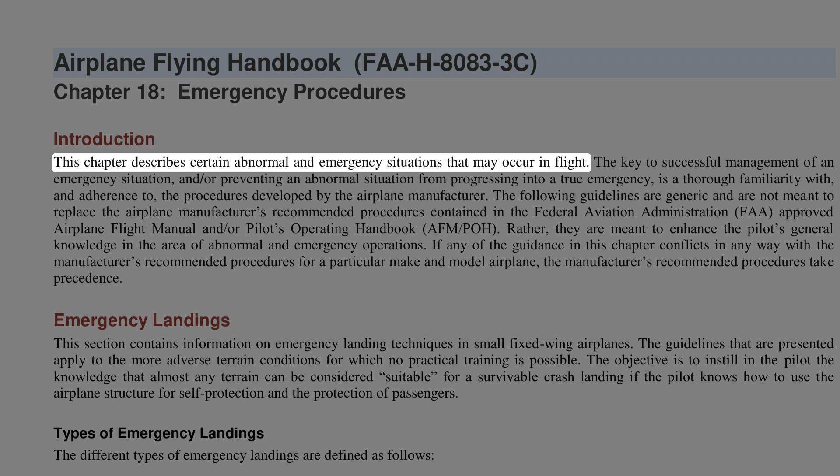Airplane Flying Handbook, FAA-H-8083-3C, Chapter 18, Emergency Procedures. Introduction. This chapter describes certain abnormal and emergency situations that may occur in flight.

The key to successful management of an emergency situation, and/or preventing an abnormal situation from progressing into a true emergency, is a thorough familiarity with, and adherence to, the procedures developed by the airplane manufacturer.

The following guidelines are generic and are not meant to replace the airplane manufacturer's recommended procedures contained in the Federal Aviation Administration (FAA) Approved Airplane Flight Manual and/or Pilot's Operating Handbook (AFM/POH). Rather, they are meant to enhance the pilot's general knowledge in the area of abnormal and emergency operations.

If any of the guidance in this chapter conflicts in any way with the manufacturer's recommended procedures for a particular make and model airplane, the manufacturer's recommended procedures take precedence.

Emergency landings. This section contains information on emergency landing techniques in small fixed-wing airplanes. The guidelines that are presented apply to the more adverse terrain conditions for which no practical training is possible. The objective is to instill in the pilot the knowledge that almost any terrain can be considered suitable for a survivable crash landing if the pilot knows how to use the airplane structure for self-protection and the protection of passengers.

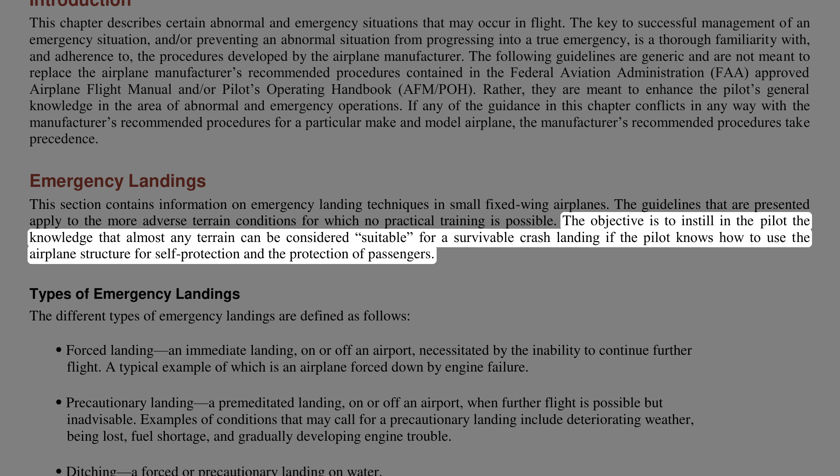Types of emergency landings. The different types of emergency landings are defined as follows. Forced landing: an immediate landing, on or off an airport, necessitated by the inability to continue further flight. A typical example of which is an airplane forced down by engine failure.

Precautionary landing: a premeditated landing, on or off an airport, when further flight is possible but inadvisable. Examples of conditions that may call for a precautionary landing include deteriorating weather, being lost, fuel shortage, and gradually developing engine trouble. Ditching: a forced or precautionary landing on water.

A precautionary landing, generally, is less hazardous than a forced landing because the pilot has more time for terrain selection and the planning of the approach. In addition, the pilot can use power to compensate for errors in judgment or technique.

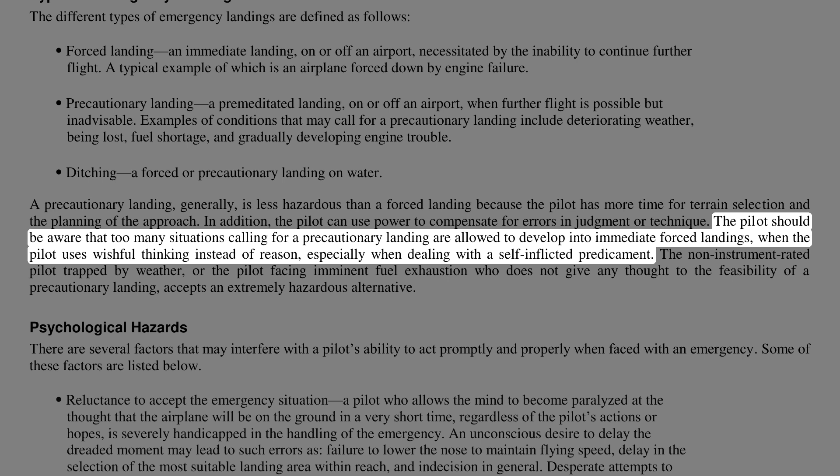The pilot should be aware that too many situations calling for a precautionary landing are allowed to develop into immediate forced landings when the pilot uses wishful thinking instead of reason, especially when dealing with a self-inflicted predicament. The non-instrument-rated pilot trapped by weather, or the pilot facing imminent fuel exhaustion who does not give any thought to the feasibility of a precautionary landing, accepts an extremely hazardous alternative.

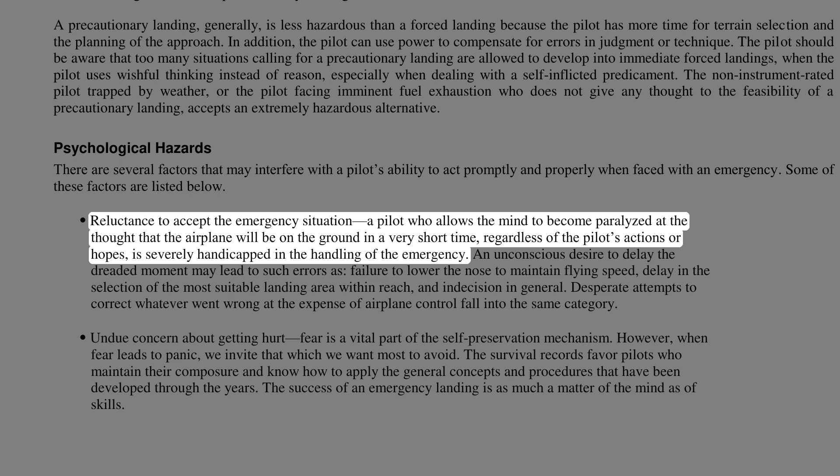Psychological hazards. There are several factors that may interfere with a pilot's ability to act promptly and properly when faced with an emergency. Some of these factors are listed below. Reluctance to accept the emergency situation. A pilot who allows the mind to become paralyzed at the thought that the airplane will be on the ground in a very short time, regardless of the pilot's actions or hopes, is severely handicapped in the handling of the emergency.

An unconscious desire to delay the dreaded moment may lead to such errors as failure to lower the nose to maintain flying speed, delay in the selection of the most suitable landing area within reach, and indecision in general. Desperate attempts to correct whatever went wrong at the expense of airplane control fall into the same category.

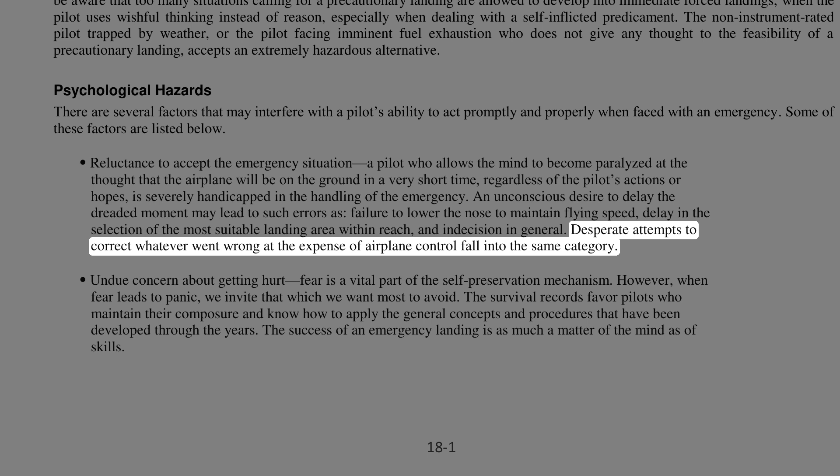Undue concern about getting hurt. Fear is a vital part of the self-preservation mechanism. However, when fear leads to panic, we invite that which we want most to avoid. The survival records favor pilots who maintain their composure and know how to apply the general concepts and procedures that have been developed through the years. The success of an emergency landing is as much a matter of the mind as of skills.

Desire to save the airplane. The pilot who has been conditioned during training to expect to find a relatively safe landing area, whenever the flight instructor closed the throttle for a simulated forced landing, may ignore all basic rules of airmanship to avoid a touchdown in terrain where airplane damage is unavoidable.

Typical consequences are making a 180 degree turn back to the runway when available altitude is insufficient, stretching the glide without regard for minimum control speed in order to reach a more appealing field, and accepting an approach and touchdown situation that leaves no margin for error.

The desire to save the airplane, regardless of the risks involved, may be influenced by two other factors: the pilot's financial stake in the airplane and the certainty that an undamaged airplane implies no bodily harm. There are times, however, when a pilot should be more interested in sacrificing the airplane so that the occupants can safely walk away from it. Basic safety concepts. General.

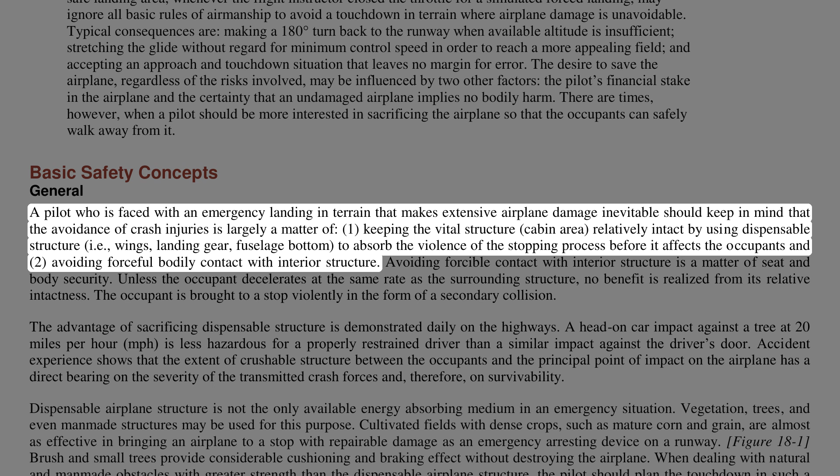A pilot who is faced with an emergency landing in terrain that makes extensive airplane damage inevitable should keep in mind that the avoidance of crash injuries is largely a matter of: 1. Keeping the vital structure, cabin area, relatively intact by using dispensable structure, i.e., wings, landing gear, fuselage bottom, to absorb the violence of the stopping process before it affects the occupants, and 2. Avoiding forceful bodily contact with interior structure.

Avoiding forcible contact with interior structure is a matter of seat and body security. Unless the occupant decelerates at the same rate as the surrounding structure, no benefit is realized from its relative intactness. The occupant is brought to a stop violently in the form of a secondary collision.

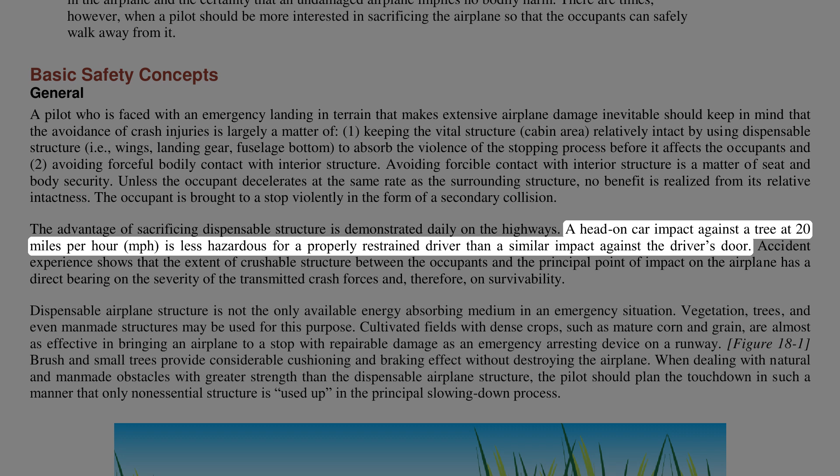The advantage of sacrificing dispensable structure is demonstrated daily on the highways. A head-on car impact against a tree at 20 miles per hour, mph, is less hazardous for a properly restrained driver than a similar impact against the driver's door. Accident experience shows that the extent of crushable structure between the occupants and the principal point of impact on the airplane has a direct bearing on the severity of the transmitted crash forces and, therefore, on survivability.

Dispensable airplane structure is not the only available energy-absorbing medium in an emergency situation. Vegetation, trees, and even man-made structures may be used for this purpose. Cultivated fields with dense crops, such as mature corn and grain, are almost as effective in bringing an airplane to a stop with repairable damage as an emergency arresting device on a runway. Brush and small trees provide considerable cushioning and braking effect without destroying the airplane.

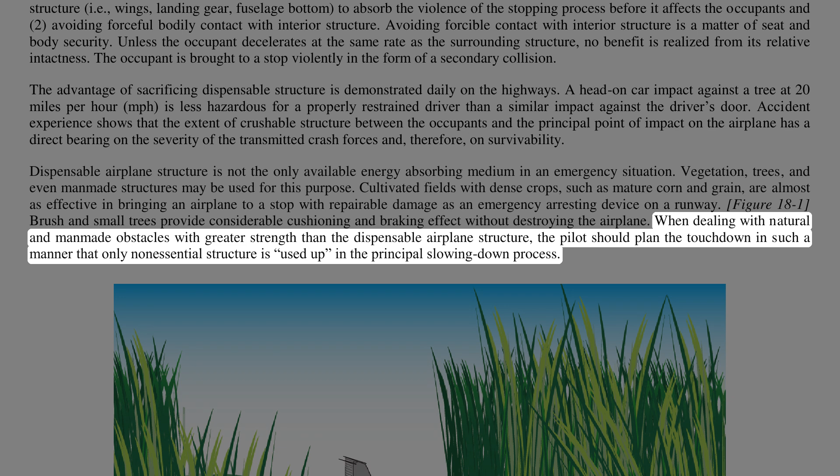When dealing with natural and man-made obstacles with greater strength than the dispensable airplane structure, the pilot should plan the touchdown in such a manner that only non-essential structure is used up in the principal slowing down process. The overall severity of a deceleration process is governed by speed, ground speed, and stopping distance. The most critical of these is speed. Doubling the ground speed means quadrupling the total destructive energy and vice versa.

Even a small change in ground speed at touchdown, be it as a result of wind or pilot technique, affects the outcome of a controlled crash. It is important that the actual touchdown during an emergency landing be made at the lowest possible controllable airspeed, using all available aerodynamic devices. Most pilots instinctively, and correctly, look for the largest available flat and open field for an emergency landing.

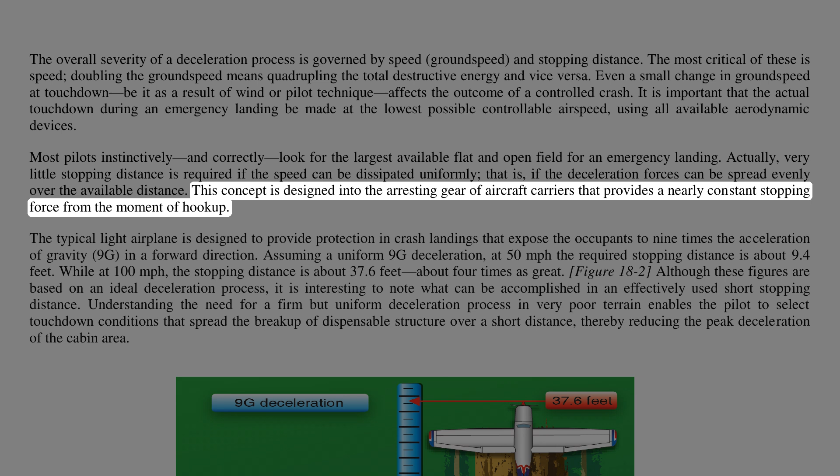Actually, very little stopping distance is required if the speed can be dissipated uniformly, that is, if the deceleration forces can be spread evenly over the available distance. This concept is designed into the arresting gear of aircraft carriers that provides a nearly constant stopping force from the moment of hookup. The typical light airplane is designed to provide protection in crash landings that expose the occupants to 9 times the acceleration of gravity, 9g, in a forward direction.

Assuming a uniform 9g deceleration, at 50 miles per hour the required stopping distance is about 9.4 feet. While at 100 miles per hour, the stopping distance is about 37.6 feet, about 4 times as great. Although these figures are based on an ideal deceleration process, it is interesting to note what can be accomplished in an effectively used short stopping distance.

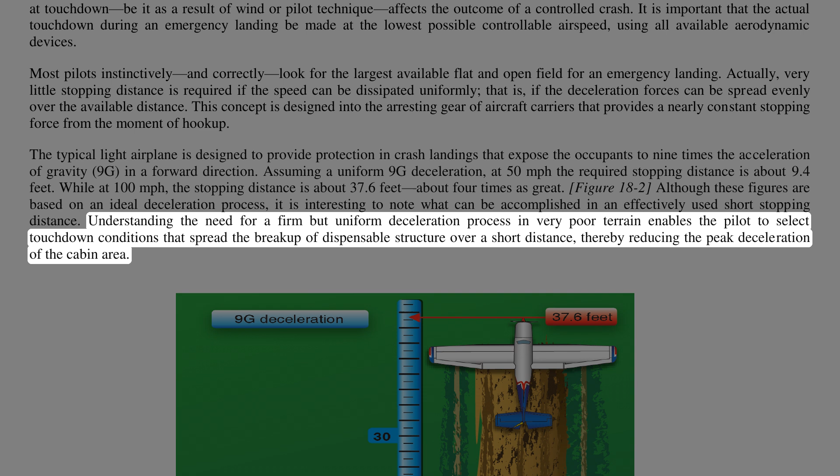Understanding the need for a firm but uniform deceleration process in very poor terrain enables the pilot to select touchdown conditions that spread the breakup of dispensable structure over a short distance, thereby reducing the peak deceleration of the cabin area. Attitude and sink rate control. The most critical and often the most inexcusable error that can be made in the planning and execution of an emergency landing, even in ideal terrain, is the loss of initiative over the airplane's attitude and sink rate at touchdown.

When the touchdown is made on flat, open terrain, an excessive nose-low pitch attitude brings the risk of sticking the nose in the ground. Steep bank angles just before touchdown should also be avoided, as they increase the stalling speed and the likelihood of a wingtip strike. Since the airplane's vertical component of velocity is immediately reduced to 0 upon ground contact, it should be kept well under control.

A flat touchdown at a high sink rate, well in excess of 500 feet per minute, FPM, on a hard surface can be injurious without destroying the cabin structure, especially during gear-up landings in low-wing airplanes. A rigid bottom construction of these airplanes may preclude adequate cushioning by structural deformation. Similar impact conditions may cause structural collapse of the overhead structure in high-wing airplanes. On soft terrain, an excessive sink rate may cause digging in of the lower nose structure and severe forward deceleration. Terrain selection.

A pilot's choice of emergency landing sites is governed by the route selected during pre-flight planning, the height above the ground when the emergency occurs, and excess airspeed. Excess airspeed can be converted into distance and/or altitude.

The only time the pilot has a very limited choice is during the low and slow portion of the takeoff. However, even under these conditions, the ability to change the impact heading only a few degrees may ensure a survivable crash. If beyond gliding distance of a suitable open area, the pilot should judge the available terrain for its energy-absorbing capability.

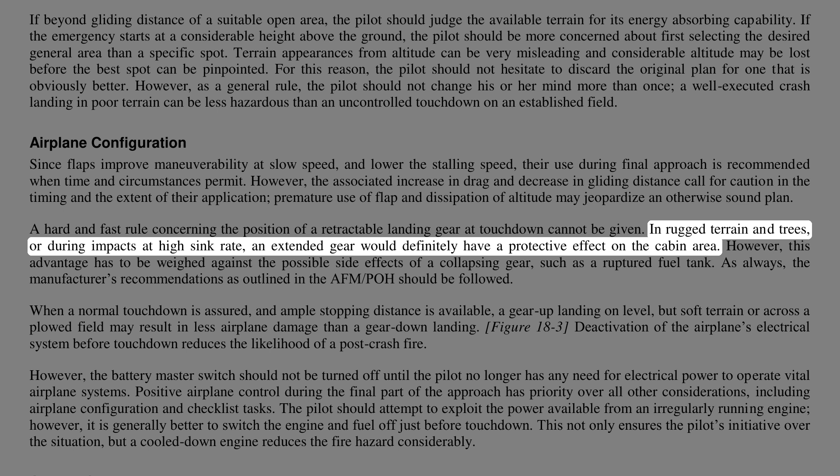A hard and fast rule concerning the position of a retractable landing gear at touchdown cannot be given. In rugged terrain and trees, or during impacts at high sink rate, an extended gear would definitely have a protective effect on the cabin area. However, this advantage has to be weighed against the possible side effects of a collapsing gear, such as a ruptured fuel tank. As always, the manufacturer's recommendations as outlined in the AFM/POH should be followed.

When a normal touchdown is assured, and ample stopping distance is available, a gear-up landing on level, but soft terrain or across a plowed field may result in less airplane damage than a gear-down landing.

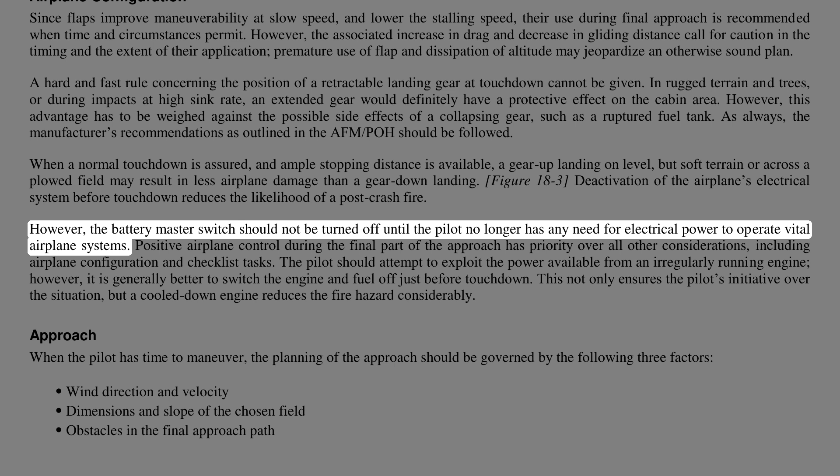Deactivation of the airplane's electrical system before touchdown reduces the likelihood of a post-crash fire. However, the battery master switch should not be turned off until the pilot no longer has any need for electrical power to operate vital airplane systems.

Positive airplane control during the final part of the approach has priority over all other considerations, including airplane configuration and checklist tasks. The pilot should attempt to exploit the power available from an irregularly running engine. However, it is generally better to switch the engine and fuel off just before touchdown. This not only ensures the pilot's initiative over the situation, but a cooled-down engine reduces the fire hazard considerably.

Approach. When the pilot has time to maneuver, the planning of the approach should be governed by three factors: wind direction and velocity, dimensions and slope of the chosen field, and obstacles in the final approach path. These three factors are seldom compatible. When compromises have to be made, the pilot should aim for a wind, obstacle, terrain combination that permits a final approach with some margin for error in judgment or technique.

A pilot who overestimates the gliding range may be tempted to stretch the glide across obstacles in the approach path. For this reason, it is sometimes better to plan the approach over an unobstructed area, regardless of wind direction. Experience shows that a collision with obstacles at the end of a ground roll or slide is much less hazardous than striking an obstacle at flying speed before the touchdown point is reached.

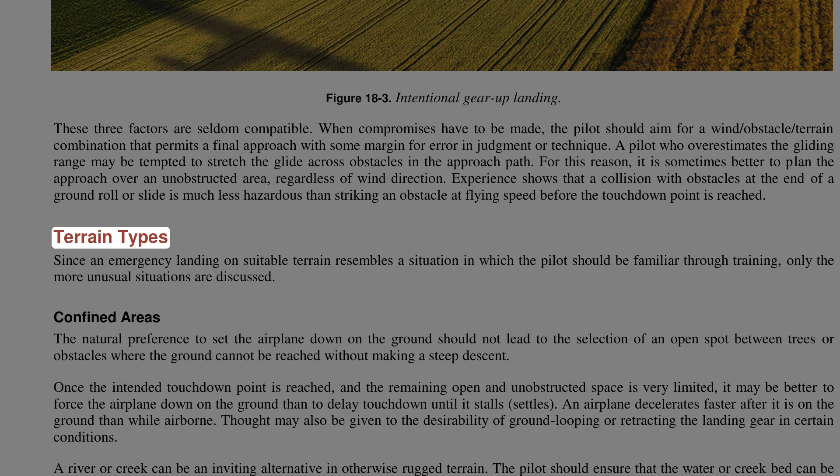Terrain types. Since an emergency landing on suitable terrain resembles a situation in which the pilot should be familiar through training, only the more unusual situations are discussed.

Confined areas. The natural preference to set the airplane down on the ground should not lead to the selection of an open spot between trees or obstacles where the ground cannot be reached without making a steep descent. Once the intended touchdown point is reached, and the remaining open and unobstructed space is very limited, it may be better to force the airplane down on the ground than to delay touchdown until it stalls and settles.

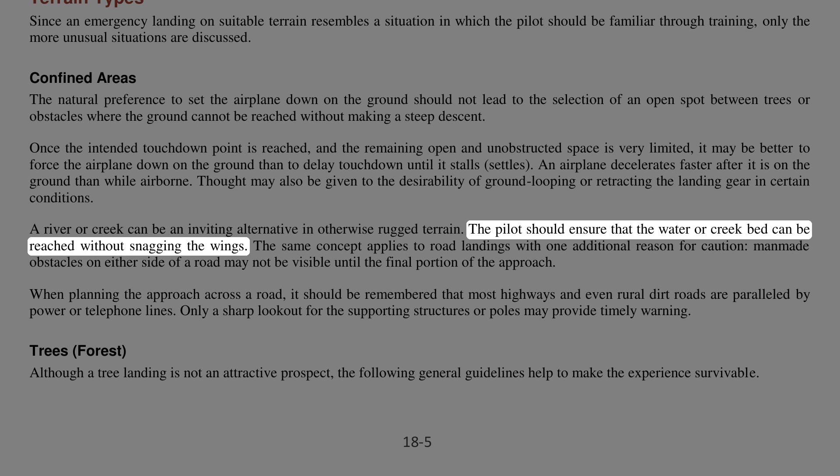An airplane decelerates faster after it is on the ground than while airborne. Thought may also be given to the desirability of ground looping or retracting the landing gear in certain conditions. A river or creek can be an inviting alternative in otherwise rugged terrain. The pilot should ensure that the water or creek bed can be reached without snagging the wings.

The same concept applies to road landings, with one additional reason for caution. Man-made obstacles on either side of a road may not be visible until the final portion of the approach. When planning the approach across a road, remember that most highways and even rural dirt roads are paralleled by power or telephone lines. Only a sharp lookout for the supporting structures or poles may provide timely warning.

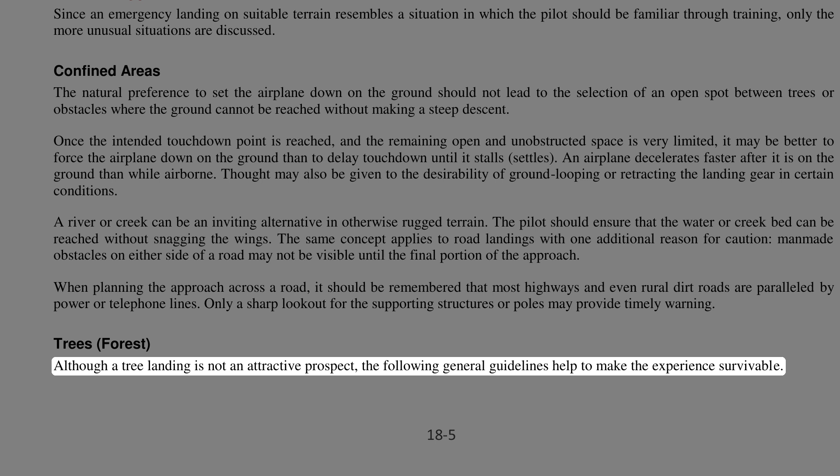Trees, forest. Although a tree landing is not an attractive prospect, the following general guidelines help make the experience survivable. Use the normal landing configuration, full flaps, gear down. Keep the ground speed low by heading into the wind. Make contact at minimum indicated airspeed, but not below stall speed, and hang the airplane in the tree branches in a nose-high landing attitude. Involving the underside of the fuselage and both wings in the initial tree contact provides a more even and positive cushioning effect, while preventing penetration of the windshield.

Avoid direct contact of the fuselage with heavy tree trunks. Low, closely spaced trees with wide, dense crowns, with branches close to the ground, are much better than tall trees with thin tops. The latter allow too much free fall height. A free fall from 75 feet results in an impact speed of about 40 knots, or about 4,000 feet per minute.

Ideally, initial tree contact should be symmetrical, that is, both wings should meet equal resistance in the tree branches. This distribution of the load helps maintain proper airplane attitude. It may also preclude the loss of one wing, which invariably leads to a more rapid and less predictable descent to the ground. If heavy tree trunk contact is unavoidable once the airplane is on the ground, it is best to involve both wings simultaneously by directing the airplane between two properly spaced trees. Do not attempt this maneuver, however, while still airborne.

Water, ditching, and snow. A well-executed water landing normally involves less deceleration violence than a poor tree landing or a touchdown on extremely rough terrain. Also, an airplane that is ditched at minimum speed and in a normal landing attitude does not immediately sink upon touchdown. Intact wings and fuel tanks, especially when empty, provide flotation for at least several minutes, even if the cabin may be just below the waterline in a high-wing airplane.

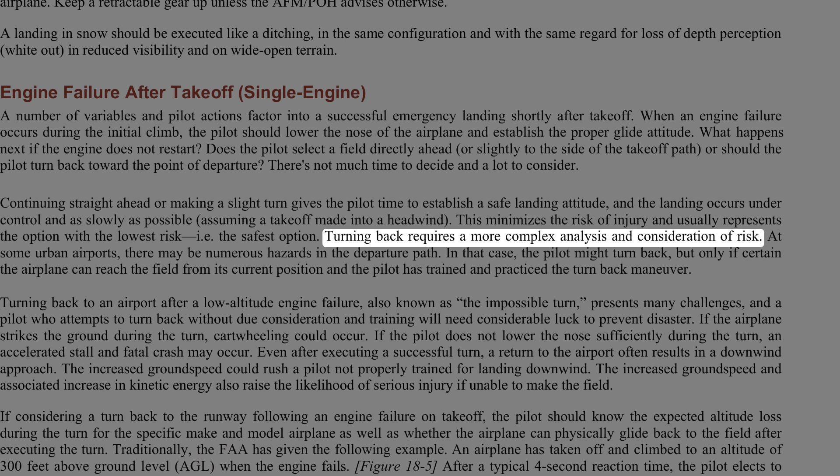Turning back requires a more complex analysis and consideration of risk. At some urban airports, there may be numerous hazards in the departure path. In that case, the pilot might turn back, but only if certain the airplane can reach the field from its current position, and the pilot has trained and practiced the turn-back maneuver.

Turning back to an airport after a low-altitude engine failure, also known as the impossible turn, presents many challenges, and a pilot who attempts to turn back without due consideration and training will need considerable luck to prevent disaster. If the airplane strikes the ground during the turn, cartwheeling could occur. If the pilot does not lower the nose sufficiently during the turn, an accelerated stall and fatal crash may occur. Even after executing a successful turn, a return to the airport often results in a downwind approach.

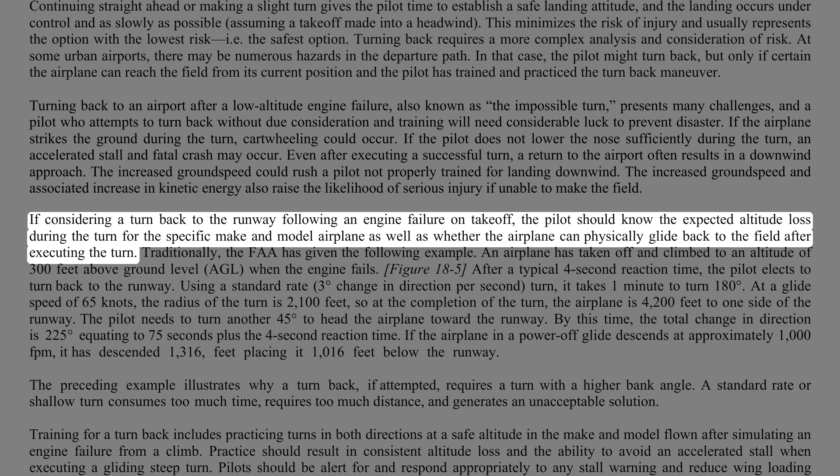The increased ground speed could rush a pilot not properly trained for landing downwind. The increased ground speed and associated increase in kinetic energy also raise the likelihood of serious injury if unable to make the field. If considering a turn back to the runway following an engine failure on takeoff, the pilot should know the expected altitude loss during the turn for the specific make and model airplane, as well as whether the airplane can physically glide back to the field after executing the turn.

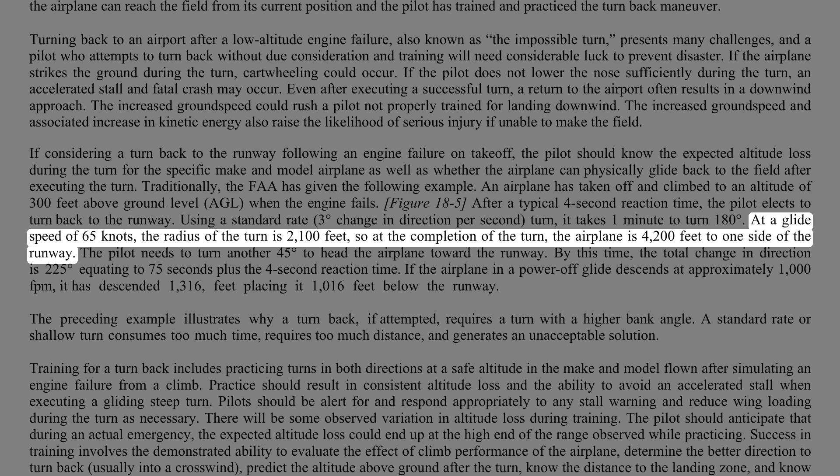Traditionally, the FAA has given the following example. An airplane has taken off and climbed to an altitude of 300 feet above ground level when the engine fails. After a typical 4-second reaction time, the pilot elects to turn back to the runway. Using a standard rate, 3 degrees change in direction per second, turn, it takes 1 minute to turn 180 degrees. At a glide speed of 65 knots, the radius of the turn is 2,100 feet, so at the completion of the turn, the airplane is 4,200 feet to one side of the runway.

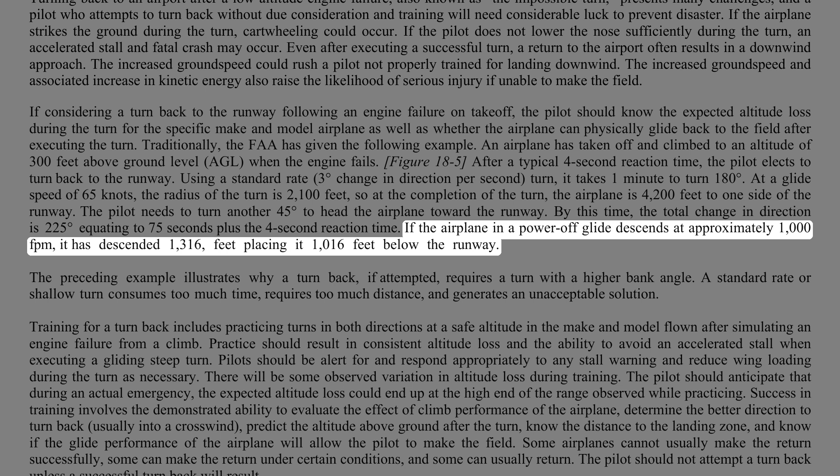The pilot needs to turn another 45 degrees to head the airplane toward the runway. By this time, the total change in direction is 225 degrees, equating to 75 seconds plus the 4-second reaction time. If the airplane in a power-off glide descends at approximately 1,000 feet per minute, it has descended 1,316 feet, placing it 1,016 feet below the runway. The preceding example illustrates why a turn back, if attempted, requires a turn with a higher bank angle. A standard rate or shallow turn consumes too much time, requires too much distance, and generates an unacceptable solution.

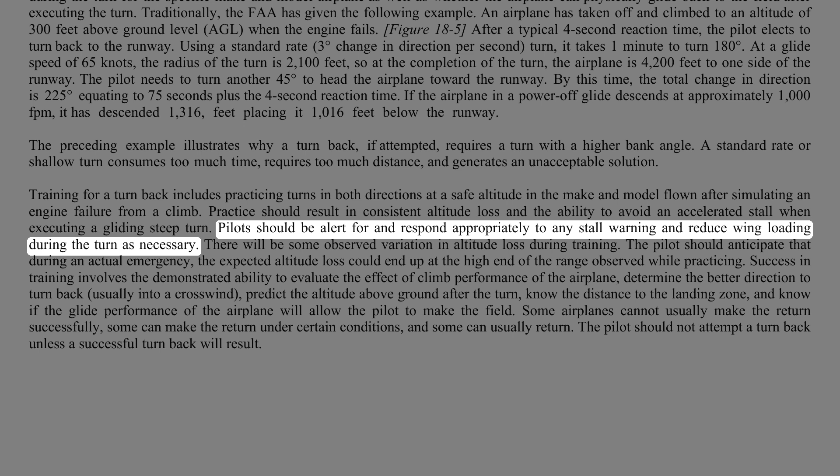Training for a turn back includes practicing turns in both directions at a safe altitude in the make and model flown, after simulating an engine failure from a climb. Practice should result in consistent altitude loss and the ability to avoid an accelerated stall when executing a gliding steep turn. Pilots should be alert for and respond appropriately to any stall warning and reduce wing loading during the turn as necessary. There will be some observed variation in altitude loss during training. The pilot should anticipate that during an actual emergency, the expected altitude loss could end up at the high end of the range observed while practicing.

Success in training involves the demonstrated ability to evaluate the effect of climb performance of the airplane, determine the better direction to turn back, usually into a crosswind, predict the altitude above ground after the turn, know the distance to the landing zone, and know if the glide performance of the airplane will allow the pilot to make the field. Some airplanes cannot usually make the return successfully, some can make the return under certain conditions, and some can usually return. The pilot should not attempt to turn back unless a successful turn back will result.

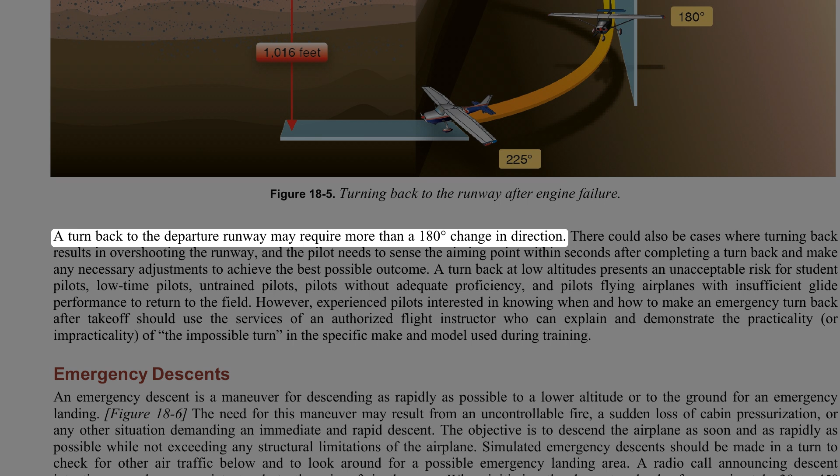A turn back to the departure runway may require more than a 180 degree change in direction. There could also be cases where turning back results in overshooting the runway, and the pilot needs to sense the aiming point within seconds after completing a turn back and make any necessary adjustments to achieve the best possible outcome.

A turn back at low altitudes presents an unacceptable risk for student pilots, low-time pilots, untrained pilots, pilots without adequate proficiency, and pilots flying airplanes with insufficient glide performance to return to the field. However, experienced pilots interested in knowing when and how to make an emergency turn back after takeoff should use the services of an authorized flight instructor who can explain and demonstrate the practicality, or impracticality, of the impossible turn in the specific make and model used during training.

Emergency descents. An emergency descent is a maneuver for descending as rapidly as possible to a lower altitude or to the ground for an emergency landing. The need for this maneuver may result from an uncontrollable fire, a sudden loss of cabin pressurization, or any other situation demanding an immediate and rapid descent.

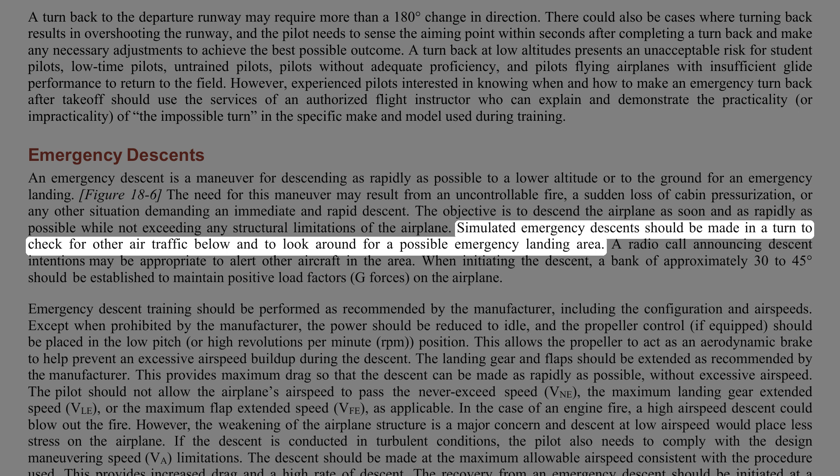The objective is to descend the airplane as soon and as rapidly as possible while not exceeding any structural limitations of the airplane. Simulated emergency descents should be made in a turn to check for other air traffic below and to look around for a possible emergency landing area. A radio call announcing descent intentions may be appropriate to alert other aircraft in the area. When initiating the descent, a bank of approximately 30 to 45 degrees should be established to maintain positive load factors, G-forces, on the airplane. Emergency descent training should be performed as recommended by the manufacturer, including the configuration and airspeeds.

Except when prohibited by the manufacturer, the power should be reduced to idle, and the propeller control, if equipped, should be placed in the low pitch, or high RPM, position. This allows the propeller to act as an aerodynamic brake to help prevent an excessive airspeed buildup during the descent.

The landing gear and flaps should be extended as recommended by the manufacturer. This provides maximum drag so that the descent can be made as rapidly as possible, without excessive airspeed. The pilot should not allow the airplane's airspeed to pass the never exceed speed, VNE, the maximum landing gear extended speed, VLE,

or the maximum flap extended speed, VFE, as applicable. In the case of an engine fire, a high airspeed descent could blow out the fire. However, the weakening of the airplane structure is a major concern, and descent at low airspeed would place less stress on the airplane. If the descent is conducted in turbulent conditions, the pilot also needs to comply with the design maneuvering speed, VA, limitations.

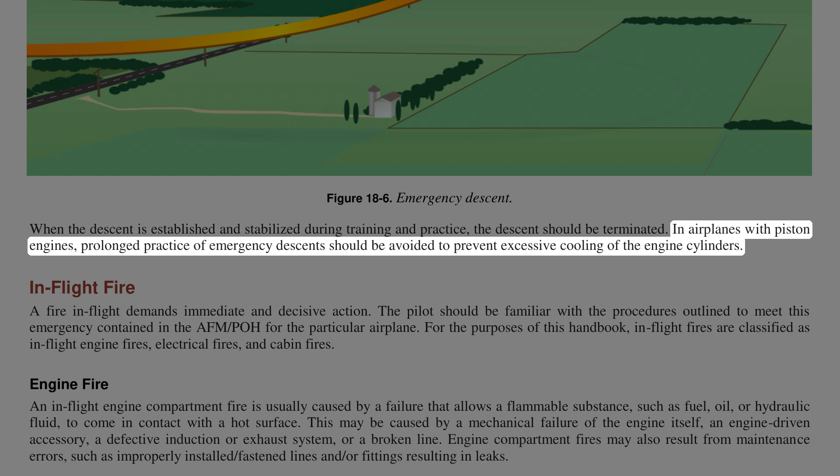The recovery from an emergency descent should be initiated at a high enough altitude to ensure a safe recovery back to level flight or a precautionary landing. When the descent is established and stabilized during training and practice, the descent should be terminated. In airplanes with piston engines, prolonged practice of emergency descents should be avoided to prevent excessive cooling of the engine cylinders.

In-flight fire. A fire in flight demands immediate and decisive action. The pilot should be familiar with the procedures outlined to meet this emergency contained in the AFM/POH for the particular airplane. For the purposes of this handbook, in-flight fires are classified as in-flight engine fires, electrical fires, and cabin fires.

Engine fire. An in-flight engine compartment fire is usually caused by a failure that allows a flammable substance, such as fuel, oil, or hydraulic fluid, to come in contact with a hot surface. This may be caused by a mechanical failure of the engine itself, an engine-driven accessory, a defective induction or exhaust system, or a broken line.

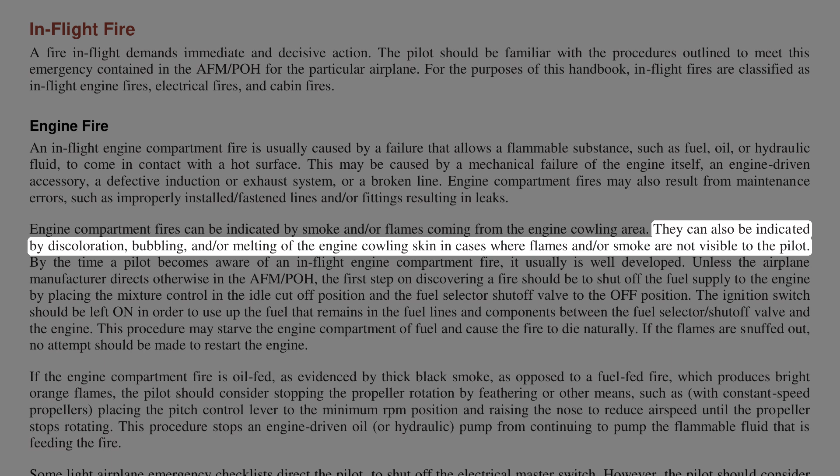Engine compartment fires may also result from maintenance errors, such as improperly installed or fastened lines and fittings resulting in leaks. Engine compartment fires can be indicated by smoke and/or flames coming from the engine cowling area. They can also be indicated by discoloration, bubbling, and/or melting of the engine cowling skin in cases where flames and/or smoke are not visible to the pilot.

By the time a pilot becomes aware of an in-flight engine compartment fire, it usually is well developed. Unless the airplane manufacturer directs otherwise in the AFM/POH, the first step on discovering a fire should be to shut off the fuel supply to the engine by placing the mixture control in the idle cutoff position and the fuel selector shutoff valve to the off position.

The ignition switch should be left on in order to use up the fuel that remains in the fuel lines and components between the fuel selector shutoff valve and the engine. This procedure may starve the engine compartment of fuel and cause the fire to die naturally. If the flames are snuffed out, no attempt should be made to restart the engine.

If the engine compartment fire is oil-fed, as evidenced by thick black smoke, as opposed to a fuel-fed fire, which produces bright orange flames, the pilot should consider stopping the propeller rotation by feathering or other means, such as, with constant speed propellers, placing the pitch control lever to the minimum RPM position and raising the nose to reduce airspeed until the propeller stops rotating.

This procedure stops an engine-driven oil or hydraulic pump from continuing to pump the flammable fluid that is feeding the fire. Some light airplane emergency checklists direct the pilot to shut off the electrical master switch. However, the pilot should consider that unless the fire is electrical in nature or a crash landing is imminent, deactivating the electrical system prevents the use of panel radios for transmitting distress messages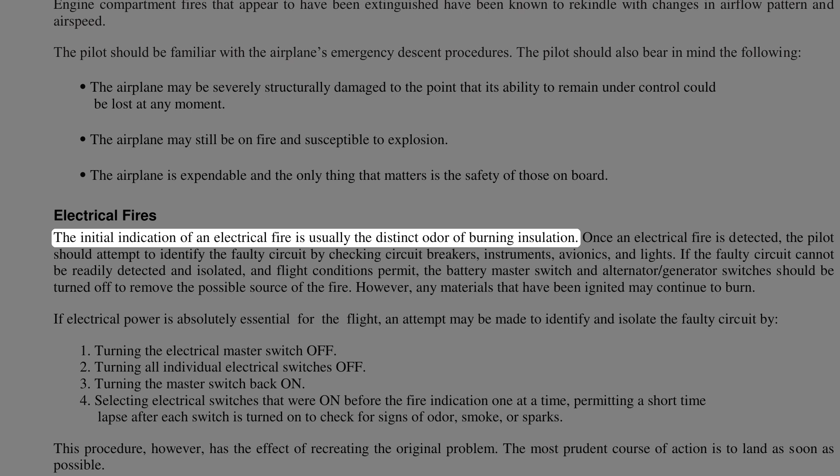Electrical fires. The initial indication of an electrical fire is usually the distinct odor of burning insulation. Once an electrical fire is detected, the pilot should attempt to identify the faulty circuit by checking circuit breakers, instruments, avionics, and lights. If the faulty circuit cannot be readily detected and isolated, and flight conditions permit, the battery master switch and alternator or generator switches should be turned off to remove the possible source of the fire.

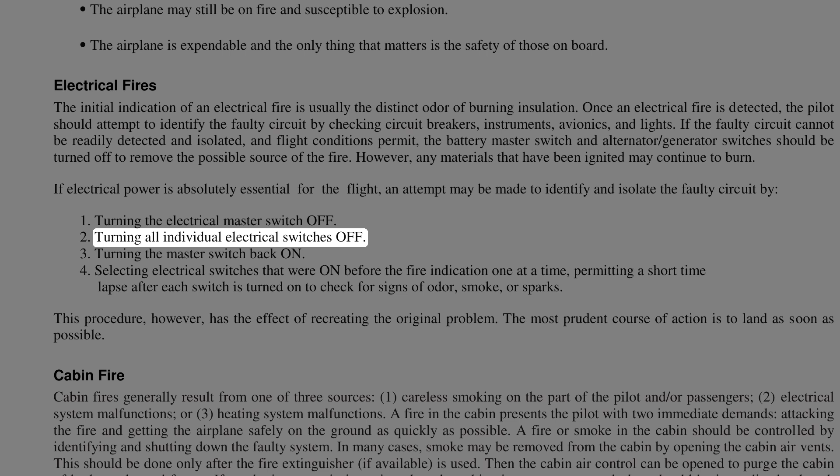However, any materials that have been ignited may continue to burn. If electrical power is absolutely essential for the flight, an attempt may be made to identify and isolate the faulty circuit by turning the electrical master switch off, turning all individual electrical switches off, turning the master switch back on, selecting electrical switches that were on before the fire indication one at a time, permitting a short time lapse after each switch is turned on to check for signs of odor, smoke, or sparks. This procedure, however, has the effect of recreating the original problem.

The most prudent course of action is to land as soon as possible. Cabin fire. Cabin fires generally result from one of three sources: careless smoking on the part of the pilot and/or passengers, electrical system malfunctions, or heating system malfunctions.

A fire in the cabin presents the pilot with two immediate demands: attacking the fire and getting the airplane safely on the ground as quickly as possible. A fire or smoke in the cabin should be controlled by identifying and shutting down the faulty system. In many cases, smoke may be removed from the cabin by opening the cabin air vents.

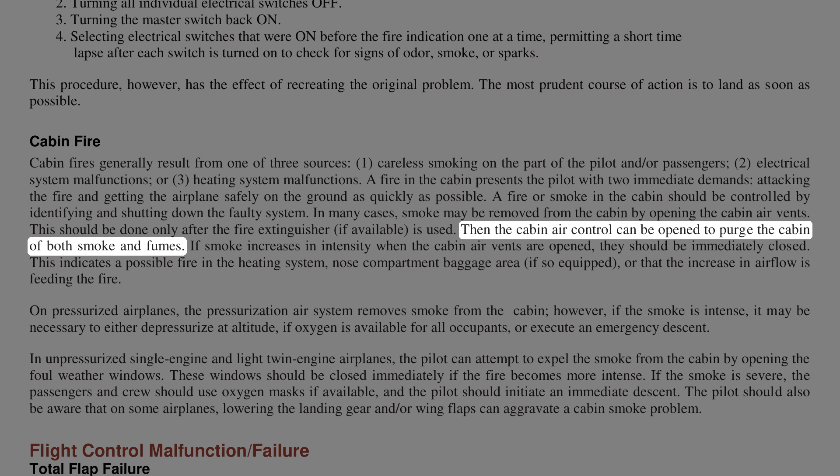This should be done only after the fire extinguisher, if available, is used. Then the cabin air control can be opened to purge the cabin of both smoke and fumes. If smoke increases in intensity when the cabin air vents are opened, they should be immediately closed. This indicates a possible fire in the heating system, nose compartment baggage area, if so equipped, or that the increase in airflow is feeding the fire.

On pressurized airplanes, the pressurization air system removes smoke from the cabin. However, if the smoke is intense, it may be necessary to either depressurize at altitude, if oxygen is available for all occupants, or execute an emergency descent.

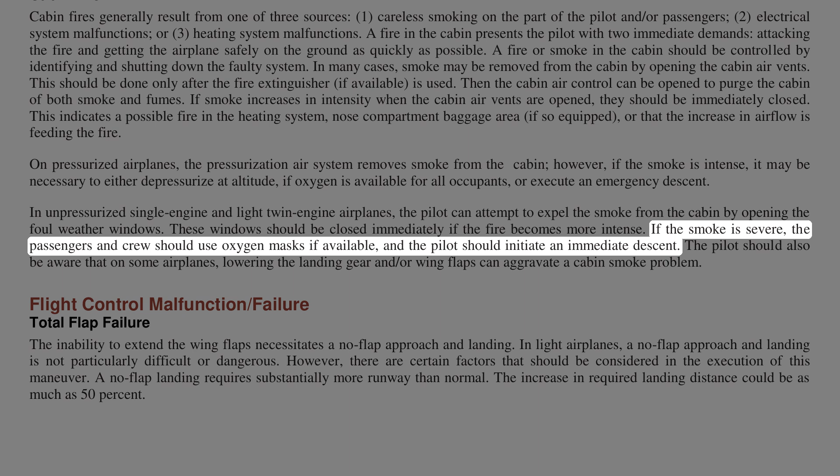In unpressurized single-engine and light twin-engine airplanes, the pilot can attempt to expel the smoke from the cabin by opening the foul weather windows. These windows should be closed immediately if the fire becomes more intense. If the smoke is severe, the passengers and crew should use oxygen masks if available, and the pilot should initiate an immediate descent. The pilot should also be aware that on some airplanes, lowering the landing gear and/or wing flaps can aggravate a cabin smoke problem.

Flight control malfunction, failure: total flap failure. The inability to extend the wing flaps necessitates a no-flap approach and landing. In light airplanes, a no-flap approach and landing is not particularly difficult or dangerous. However, there are certain factors that should be considered in the execution of this maneuver.

A no-flap landing requires substantially more runway than normal. The increase in required landing distance could be as much as 50%. When flying in the traffic pattern with the wing flaps retracted, the airplane should be flown in a relatively nose-high attitude to maintain altitude, as compared to flight with flaps extended.

Losing altitude can be more of a problem without the benefit of the drag normally provided by flaps. A wider, longer traffic pattern may be required in order to avoid the necessity of diving to lose altitude and consequently building up excessive airspeed.

On final approach, a nose-high attitude can make it difficult to see the runway. This situation, if not anticipated, can result in serious errors in judgment of height and distance. Approaching the runway in a relatively nose-high attitude can also cause the perception that the airplane is close to a stall. This may cause the pilot to lower the nose abruptly and risk touching down on the nose wheel.

With the flaps retracted and the power reduced for landing, the airplane is slightly less stable in the pitch and roll axes.

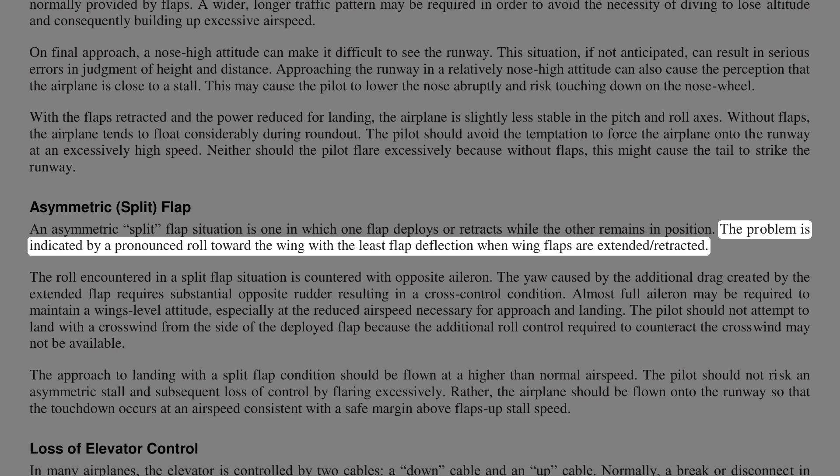Asymmetric (split) flap. An asymmetric (split) flap situation is one in which one flap deploys or retracts while the other remains in position. The problem is indicated by a pronounced roll toward the wing with the least flap deflection when wing flaps are extended or retracted. The roll encountered in a split flap situation is countered with opposite aileron.

The yaw caused by the additional drag created by the extended flap requires substantial opposite rudder, resulting in a cross-control condition. Almost full aileron may be required to maintain a wings level attitude, especially at the reduced airspeed necessary for approach and landing. The pilot should not attempt to land with a crosswind from the side of the deployed flap because the additional roll control required to counteract the crosswind may not be available.

The approach to landing with a split flap condition should be flown at a higher than normal airspeed. The pilot should not risk an asymmetric stall and subsequent loss of control by flaring excessively. Rather, the airplane should be flown onto the runway so that the touchdown occurs at an airspeed consistent with a safe margin above flaps up stall speed.

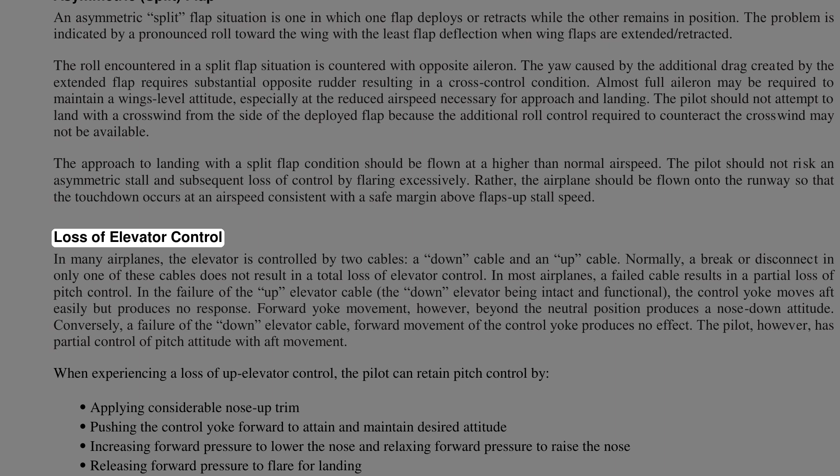Loss of elevator control. In many airplanes, the elevator is controlled by two cables, a down cable and an up cable. Normally, a break or disconnect in only one of these cables does not result in a total loss of elevator control. In most airplanes, a failed cable results in a partial loss of pitch control. In the failure of the up elevator cable, the down elevator being intact and functional, the control yoke moves aft easily but produces no response.

Forward yoke movement, however, beyond the neutral position produces a nose-down attitude. Conversely, with a failure of the down elevator cable, forward movement of the control yoke produces no effect. The pilot, however, has partial control of pitch attitude with aft movement.

When experiencing a loss of up elevator control, the pilot can retain pitch control by applying considerable nose-up trim, pushing the control yoke forward to attain and maintain desired attitude, increasing forward pressure to lower the nose and relaxing forward pressure to raise the nose, releasing forward pressure to flare for landing.

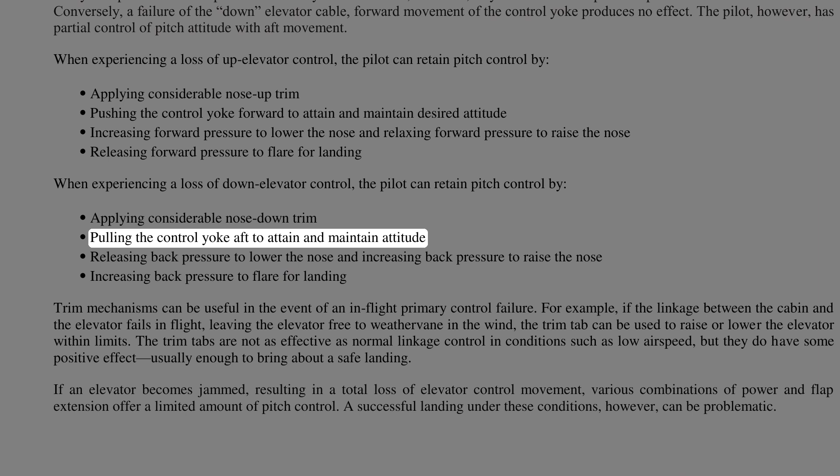When experiencing a loss of down elevator control, the pilot can retain pitch control by applying considerable nose-down trim, pulling the control yoke aft to attain and maintain attitude, releasing back pressure to lower the nose and increasing back pressure to raise the nose, increasing back pressure to flare for landing.

Trim mechanisms can be useful in the event of an in-flight primary control failure. For example, if the linkage between the cabin and the elevator fails in flight, leaving the elevator free to weathervane in the wind, the trim tab can be used to raise or lower the elevator within limits. The trim tabs are not as effective as normal linkage control in conditions such as low airspeed, but they do have some positive effect, usually enough to bring about a safe landing.

If an elevator becomes jammed, resulting in a total loss of elevator control movement, various combinations of power and flap extension offer a limited amount of pitch control. A successful landing under these conditions, however, can be problematic.

Landing gear malfunction. Once the pilot has confirmed that the landing gear has in fact malfunctioned and that one or more gear legs refuses to respond to the conventional or alternate methods of gear extension contained in the AFM/POH, a gear-up landing is considered inevitable. The pilot should select an airport with crash and rescue facilities, if possible. The pilot should not hesitate to request that emergency equipment is standing by.

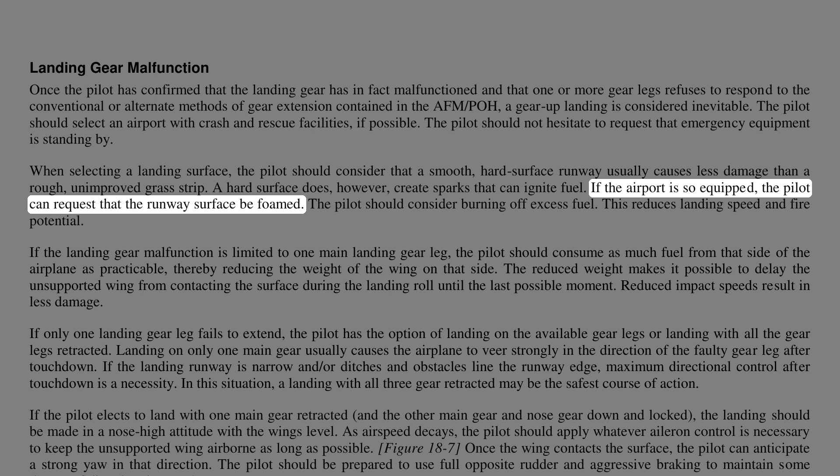When selecting a landing surface, the pilot should consider that a smooth, hard surface runway usually causes less damage than a rough, unimproved grass strip. A hard surface does, however, create sparks that can ignite fuel. If the airport is so equipped, the pilot can request that the runway surface be foamed. The pilot should consider burning off excess fuel. This reduces landing speed and fire potential.

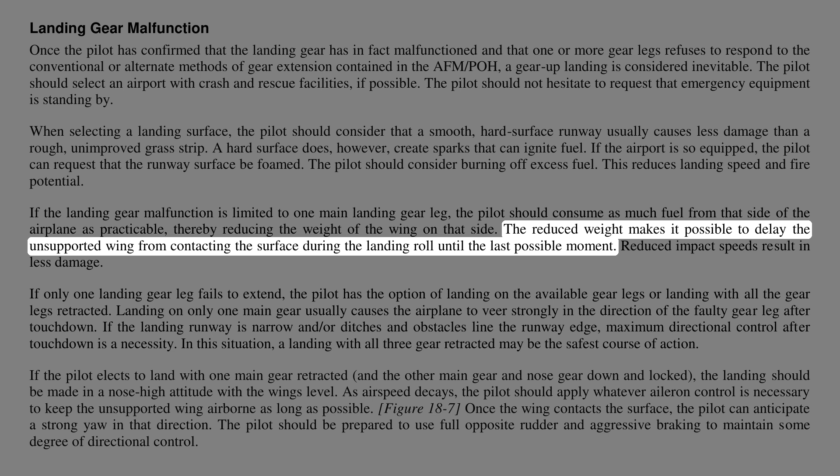If the landing gear malfunction is limited to one main landing gear leg, the pilot should consume as much fuel from that side of the airplane as practicable, thereby reducing the weight of the wing on that side. The reduced weight makes it possible to delay the unsupported wing from contacting the surface during the landing roll until the last possible moment. Reduced impact speeds result in less damage.

If only one landing gear leg fails to extend, the pilot has the option of landing on the available gear legs or landing with all the gear legs retracted. Landing on only one main gear usually causes the airplane to veer strongly in the direction of the faulty gear leg after touchdown. If the landing runway is narrow and/or ditches and obstacles line the runway edge, maximum directional control after touchdown is a necessity. In this situation, a landing with all three gear retracted may be the safest course of action.

If the pilot elects to land with one main gear retracted, and the other main gear and nose gear down and locked, the landing should be made in a nose-high attitude with the wings level. As airspeed decays, the pilot should apply whatever aileron control is necessary to keep the unsupported wing airborne as long as possible. Once the wing contacts the surface, the pilot can anticipate a strong yaw in that direction. The pilot should be prepared to use full opposite rudder and aggressive braking to maintain some degree of directional control.

When landing with a retracted nose wheel, and the main gear extended and locked, the pilot should hold the nose off the ground until almost full-up elevator has been applied. The pilot should then release back pressure in such a manner that the nose settles slowly to the surface. Applying and holding full-up elevator results in the nose abruptly dropping to the surface as airspeed decays, possibly resulting in burrowing and/or additional damage. Brake pressure should not be applied during the landing roll unless absolutely necessary to avoid a collision with obstacles.

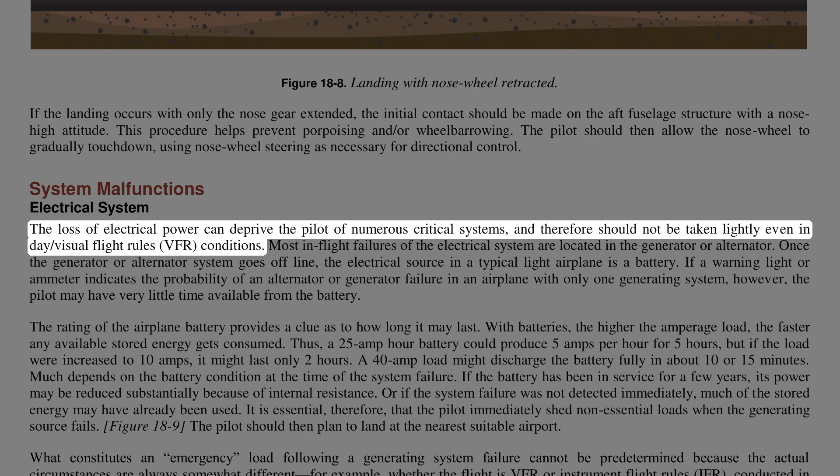The loss of electrical power can deprive the pilot of numerous critical systems, and therefore should not be taken lightly even in day, visual flight rules, VFR, conditions. Most in-flight failures of the electrical system are located in the generator or alternator. Once the generator or alternator system goes offline, the electrical source in a typical light airplane is a battery. If a warning light or ammeter indicates the probability of an alternator or generator failure in an airplane with only one generating system, however, the pilot may have very little time available from the battery.

The rating of the airplane battery provides a clue as to how long it may last. With batteries, the higher the amperage load, the faster any available stored energy gets consumed. Thus, a 25 amp-hour battery could produce 5 amps per hour for 5 hours, but if the load were increased to 10 amps, it might last only 2 hours. A 40 amp load might discharge the battery fully in about 10 or 15 minutes. Much depends on the battery condition at the time of the system failure.

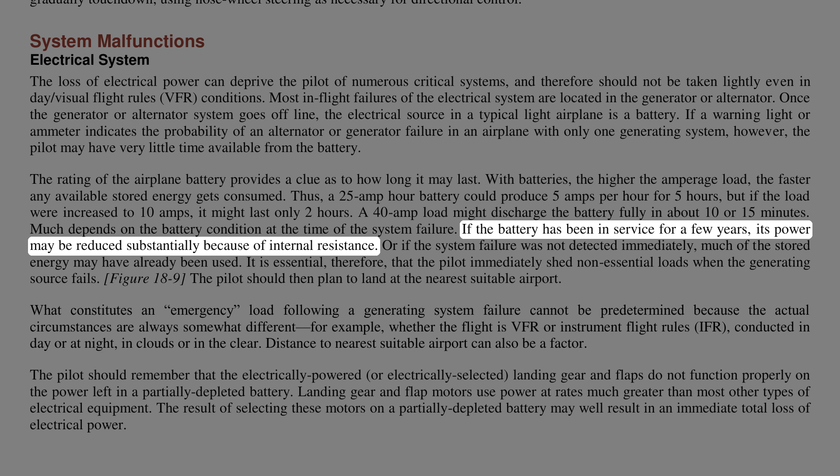If the battery has been in service for a few years, its power may be reduced substantially because of internal resistance. Or if the system failure was not detected immediately, much of the stored energy may have already been used. It is essential, therefore, that the pilot immediately shed non-essential loads when the generating source fails. The pilot should then plan to land at the nearest suitable airport.

What constitutes an emergency load following a generating system failure cannot be predetermined because the actual circumstances are always somewhat different. For example, whether the flight is VFR or Instrument Flight Rules, IFR, conducted in day or at night, in clouds or in the clear. Distance to nearest suitable airport can also be a factor.

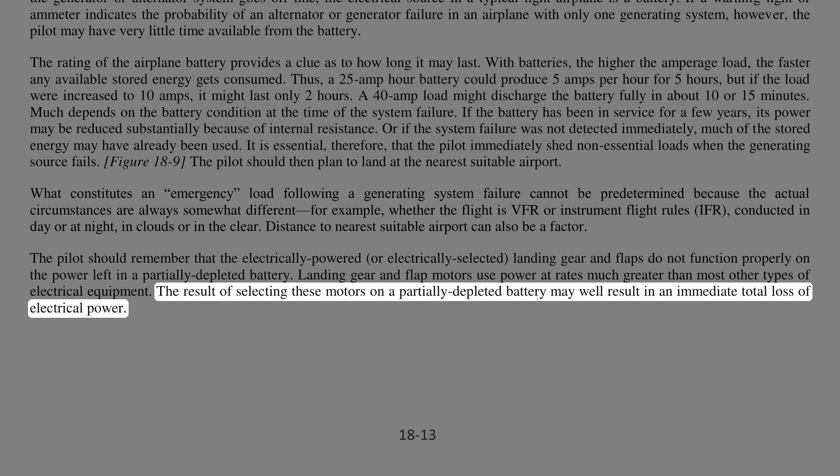The pilot should remember that the electrically powered or electrically selected landing gear and flaps do not function properly on the power left in a partially depleted battery. Landing gear and flap motors use power at rates much greater than most other types of electrical equipment. The result of selecting these motors on a partially depleted battery may well result in an immediate total loss of electrical power. If the pilot expects an imminent and complete in-flight loss of electrical power, the following steps should be taken.

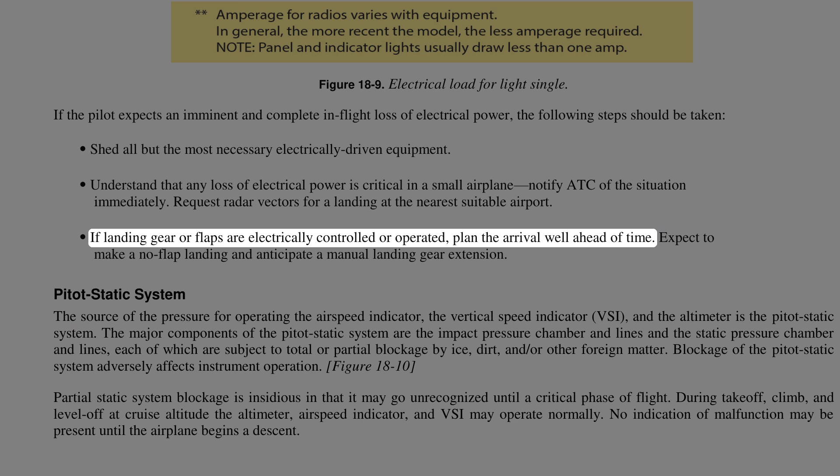Shed all but the most necessary electrically driven equipment. Understand that any loss of electrical power is critical in a small airplane. Notify ATC of the situation immediately. Request radar vectors for a landing at the nearest suitable airport. If landing gear or flaps are electrically controlled or operated, plan the arrival well ahead of time. Expect to make a no-flap landing and anticipate a manual landing gear extension.

Pitot-Static System. The source of the pressure for operating the airspeed indicator, the vertical speed indicator (VSI), and the altimeter is the Pitot-Static System. The major components of the Pitot-Static System are the impact pressure chamber and lines and the static pressure chamber and lines, each of which are subject to total or partial blockage by ice, dirt, and/or other foreign matter. Blockage of the Pitot-Static System adversely affects instrument operation.

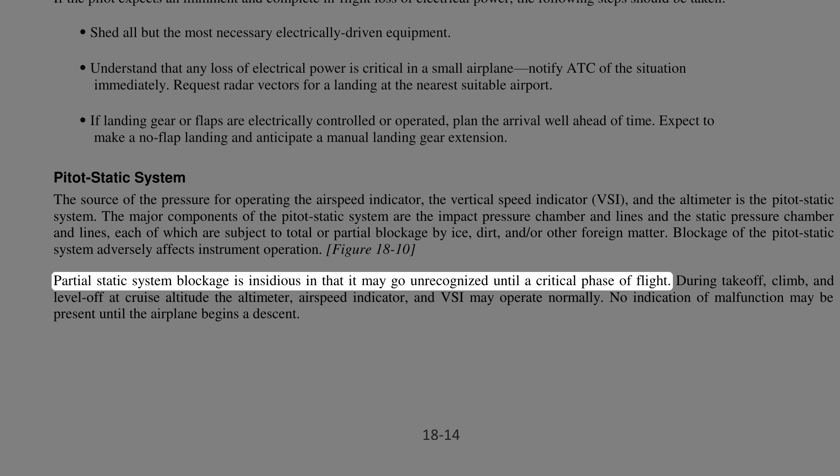Partial static system blockage is insidious in that it may go unrecognized until a critical phase of flight. During takeoff, climb, and level off at cruise altitude, the altimeter, airspeed indicator, and VSI may operate normally. No indication of malfunction may be present until the airplane begins a descent. If the static reference system is severely restricted, but not entirely blocked, as the airplane descends, the static reference pressure at the instruments begins to lag behind the actual outside air pressure.

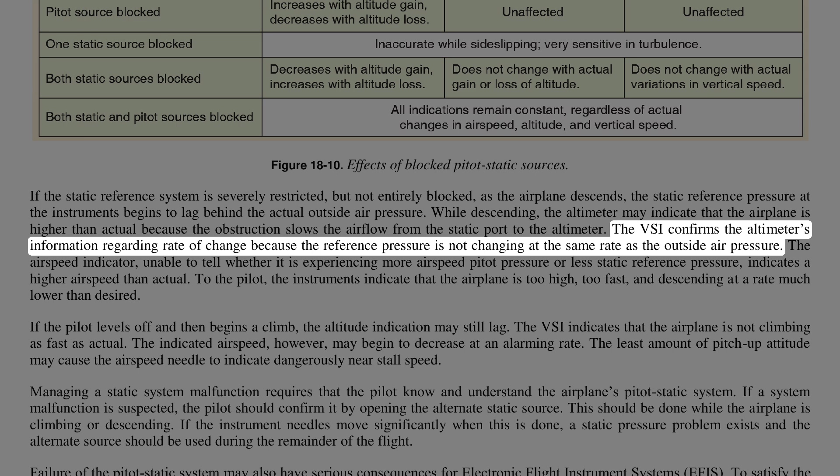While descending, the altimeter may indicate that the airplane is higher than actual because the obstruction slows the airflow from the static port to the altimeter. The VSI confirms the altimeter's information regarding rate of change because the reference pressure is not changing at the same rate as the outside air pressure. The airspeed indicator, unable to tell whether it is experiencing more airspeed pitot pressure or less static reference pressure, indicates a higher airspeed than actual.

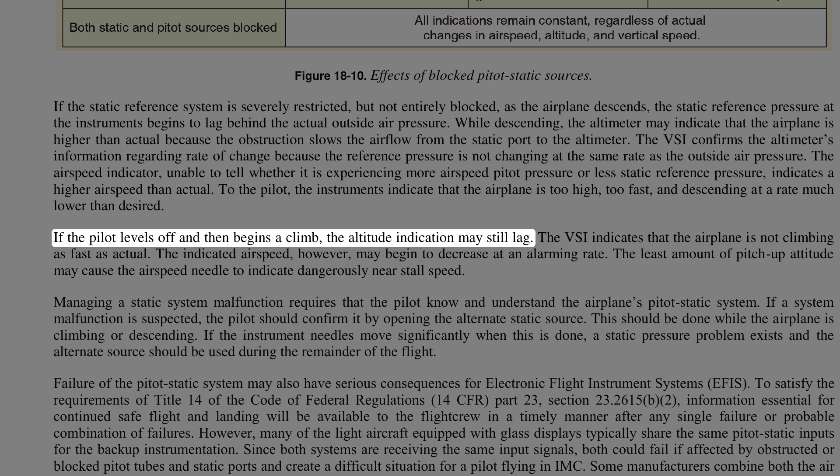To the pilot, the instruments indicate that the airplane is too high, too fast, and descending at a rate much lower than desired. If the pilot levels off and then begins a climb, the altitude indication may still lag. The VSI indicates that the airplane is not climbing as fast as actual. The indicated airspeed, however, may begin to decrease at an alarming rate. The least amount of pitch-up attitude may cause the airspeed needle to indicate dangerously near stall speed.

Managing a static system malfunction requires that the pilot know and understand the airplane's Pitot-Static System. If a system malfunction is suspected, the pilot should confirm it by opening the alternate static source. This should be done while the airplane is climbing or descending. If the instrument needles move significantly when this is done, a static pressure problem exists and the alternate source should be used during the remainder of the flight.

Failure of the Pitot-Static System may also have serious consequences for electronic flight instrument systems (EFIS). To satisfy the requirements of Title 14 of the Code of Federal Regulations (14 CFR) Part 23, Section 23.2615(b)(2), information essential for continued safe flight and landing will be available to the flight crew in a timely manner after any single failure or probable combination of failures.

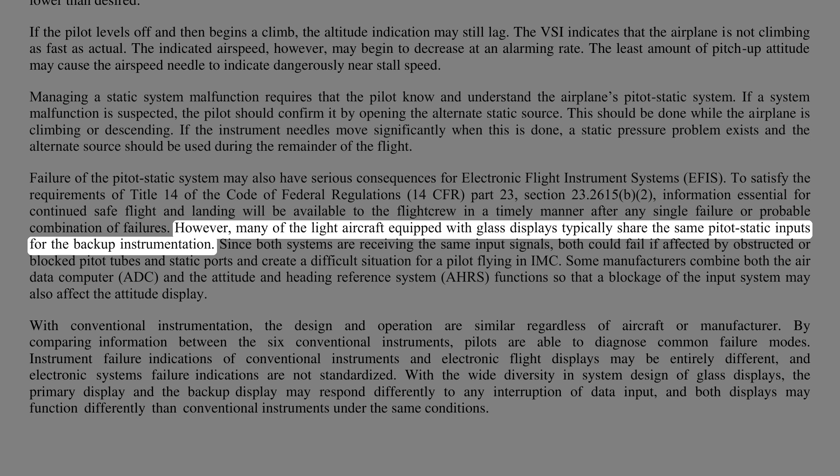However, many of the light aircraft equipped with glass displays typically share the same Pitot-Static inputs for the backup instrumentation. Since both systems are receiving the same input signals, both could fail if affected by obstructed or blocked pitot tubes and static ports and create a difficult situation for a pilot flying in IMC. Some manufacturers combine both the Air Data Computer (ADC) and the Attitude and Heading Reference System (AHRS) functions so that a blockage of the input system may also affect the attitude display.

With conventional instrumentation, the design and operation are similar regardless of aircraft or manufacturer. By comparing information between the 6 conventional instruments, pilots are able to diagnose common failure modes. Instrument failure indications of conventional instruments and electronic flight displays may be entirely different, and electronic systems failure indications are not standardized. With the wide diversity in system design of glass displays, the primary display and the backup display may respond differently to any interruption of data input, and both displays may function differently than conventional instruments under the same conditions.

It is imperative for pilots to obtain equipment-specific information in reference to both the aircraft and the avionics that fully prepare them to interpret and properly respond to equipment malfunctions of electronic flight instrument displays. Rapidly changing equipment, complex systems, and the difficulty or inability to simulate failure modes and functions can impose training limitations. Pilots still should be able to respond to equipment malfunctions in a timely manner without impairing other critical flight tasks should the need arise.

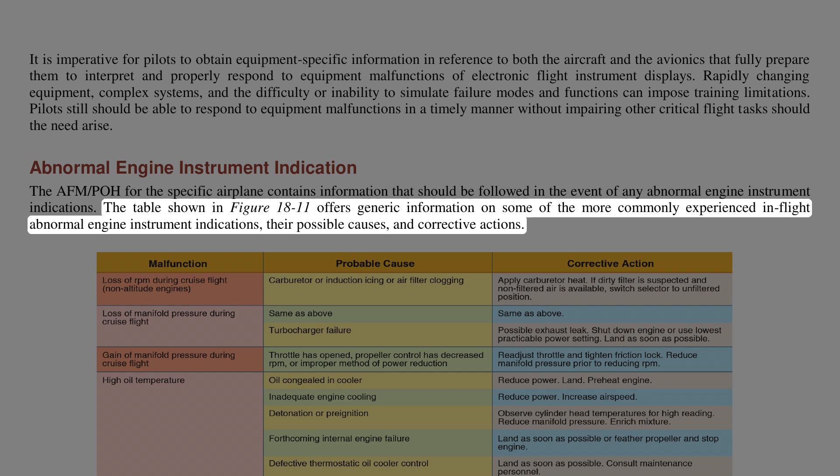Door opening in flight. In most instances, the occurrence of an inadvertent door opening is not of great concern to the safety of a flight, but rather, the pilot's reaction at the moment the incident happens.

A door opening in flight may be accompanied by a sudden loud noise, sustained noise level, and possible vibration or buffeting. If a pilot allows himself or herself to become distracted to the point where attention is focused on the open door rather than maintaining control of the airplane, loss of control may result.

Even though disruption of airflow by the door is minimal, in the event of an inadvertent door opening in flight or on takeoff, the pilot should adhere to the following: concentrate on flying the airplane, particularly in light single and twin-engine airplanes. A cabin door that opens in flight seldom if ever compromises the airplane's ability to fly. There may be some handling effects, such as roll and/or yaw, but in most instances these can be easily overcome.

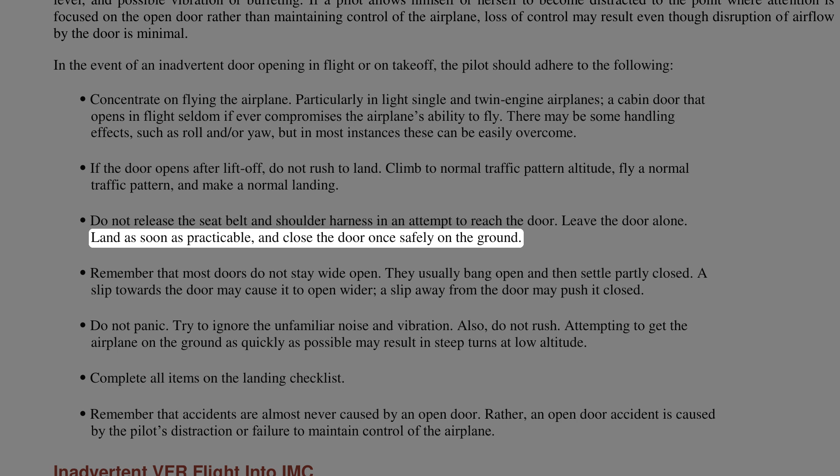If the door opens after liftoff, do not rush to land. Climb to normal traffic pattern altitude, fly a normal traffic pattern, and make a normal landing. Do not release the seat belt and shoulder harness in an attempt to reach the door. Leave the door alone, land as soon as practicable, and close the door once safely on the ground.

Remember that most doors do not stay wide open. They usually bang open and then settle partly closed. A slip towards the door may cause it to open wider. A slip away from the door may push it closed.

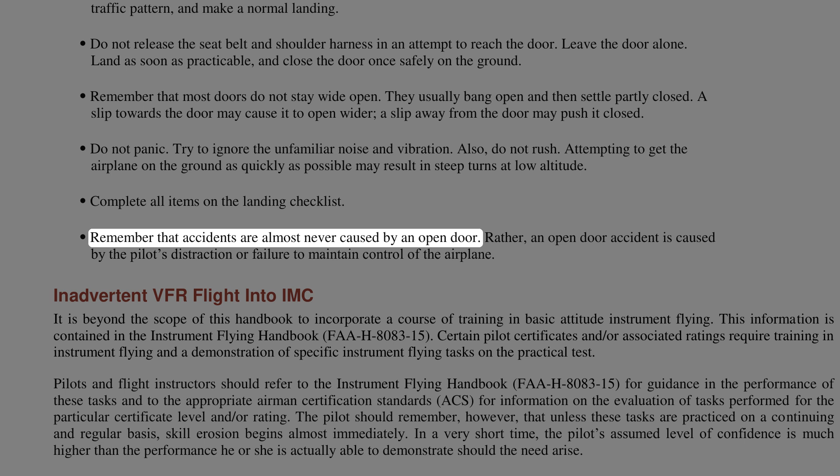Do not panic. Try to ignore the unfamiliar noise and vibration. Also, do not rush. Attempting to get the airplane on the ground as quickly as possible may result in steep turns at low altitude. Complete all items on the landing checklist. Remember that accidents are almost never caused by an open door. Rather, an open door accident is caused by the pilot's distraction or failure to maintain control of the airplane.

Inadvertent VFR flight into IMC.

It is beyond the scope of this handbook to incorporate a course of training in basic attitude instrument flying. This information is contained in the Instrument Flying Handbook, FAA-H-8083-15. Certain pilot certificates and/or associated ratings require training in instrument flying and a demonstration of specific instrument flying tasks on the practical test. Pilots and flight instructors should refer to the Instrument Flying Handbook, FAA-H-8083-15, for guidance in the performance of these tasks and to the appropriate Airman Certification Standards, ACS, for information on the evaluation of tasks performed for the particular certificate level and/or rating.

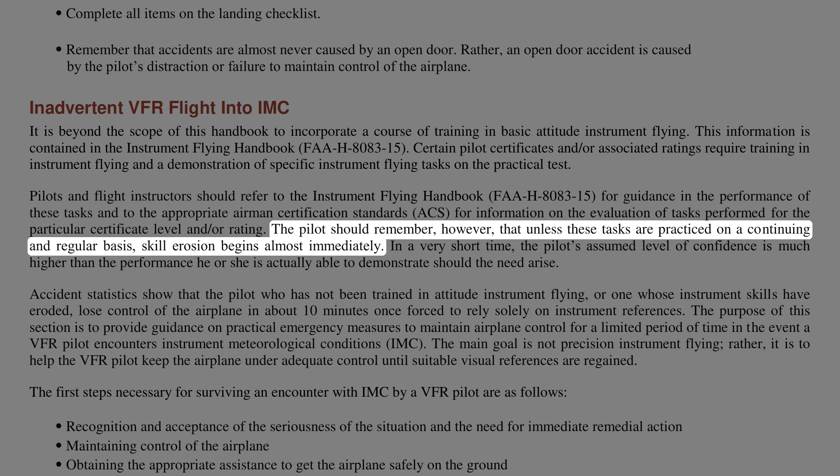The pilot should remember, however, that unless these tasks are practiced on a continuing and regular basis, skill erosion begins almost immediately. In a very short time, the pilot's assumed level of confidence is much higher than the performance he or she is actually able to demonstrate should the need arise.

Accident statistics show that the pilot who has not been trained in attitude instrument flying, or one whose instrument skills have eroded, loses control of the airplane in about 10 minutes once forced to rely solely on instrument references.

The purpose of this section is to provide guidance on practical emergency measures to maintain airplane control for a limited period of time in the event a VFR pilot encounters instrument meteorological conditions, IMC. The main goal is not precision instrument flying, rather, it is to help the VFR pilot keep the airplane under adequate control until suitable visual references are regained.

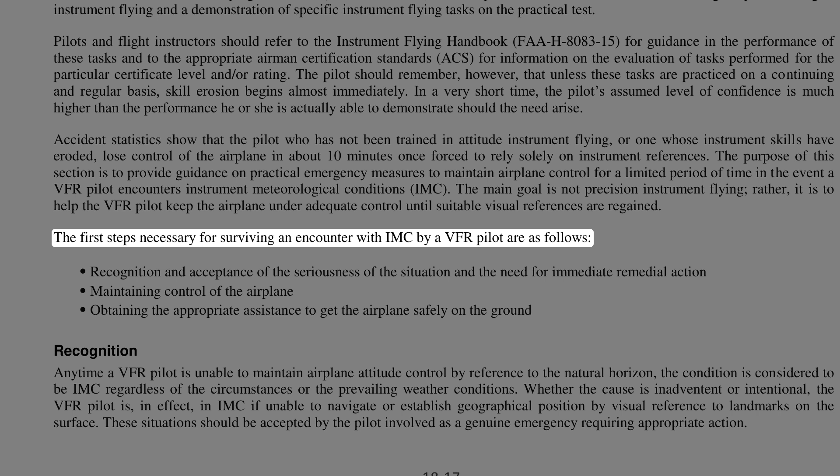The first steps necessary for surviving an encounter with IMC by a VFR pilot are as follows: recognition and acceptance of the seriousness of the situation and the need for immediate remedial action; maintaining control of the airplane; and obtaining the appropriate assistance to get the airplane safely on the ground.

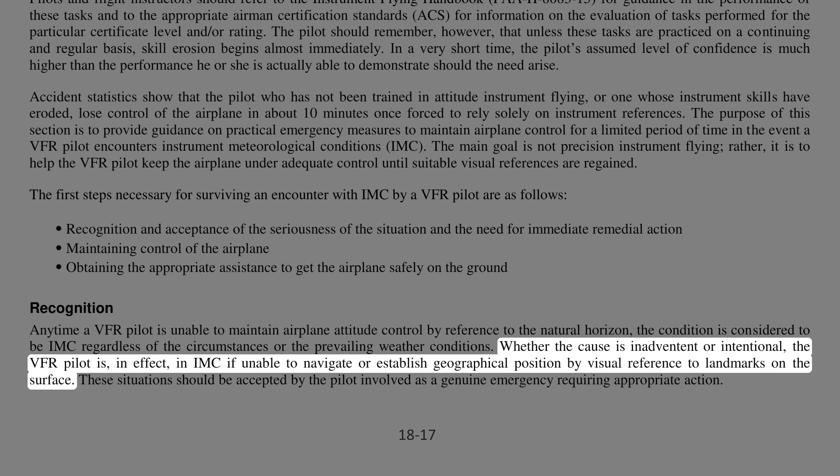Recognition. Anytime a VFR pilot is unable to maintain airplane attitude control by reference to the natural horizon, the condition is considered to be IMC regardless of the circumstances or the prevailing weather conditions. Whether the cause is inadvertent or intentional, the VFR pilot is, in effect, in IMC if unable to navigate or establish geographical position by visual reference to landmarks on the surface.

These situations should be accepted by the pilot involved as a genuine emergency requiring appropriate action. Pilots should understand that unless they are trained, qualified, and current in the control of an airplane solely by reference to flight instruments, they will be unable to do so for any length of time.

Many hours of VFR flying using the attitude indicator as a reference for airplane control may lull pilots into a false sense of security based on an overestimation of their personal ability to control the airplane solely by instrument references. In VFR conditions, even though the pilot believes the instrument references will be easy to use, the pilot also receives an overview of the natural horizon and may subconsciously rely on it more than the attitude indicator.

If the natural horizon were to suddenly disappear, the untrained instrument pilot would be subject to vertigo, spatial disorientation, and inevitable control loss. Maintaining airplane control.

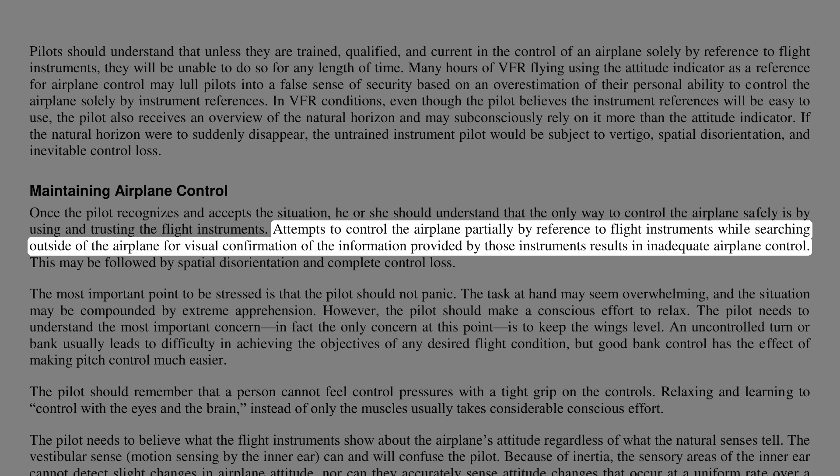Once the pilot recognizes and accepts the situation, he or she should understand that the only way to control the airplane safely is by using and trusting the flight instruments. Attempts to control the airplane partially by reference to flight instruments while searching outside of the airplane for visual confirmation of the information provided by those instruments results in inadequate airplane control. This may be followed by spatial disorientation and complete control loss.

The most important point to be stressed is that the pilot should not panic. The task at hand may seem overwhelming, and the situation may be compounded by extreme apprehension. However, the pilot should make a conscious effort to relax.

The pilot needs to understand the most important concern, in fact the only concern at this point, is to keep the wings level. An uncontrolled turn or bank usually leads to difficulty in achieving the objectives of any desired flight condition, but good bank control has the effect of making pitch control much easier.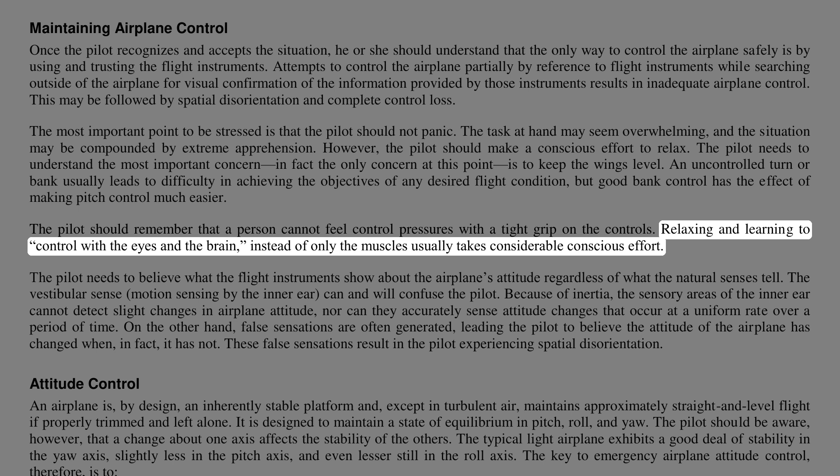The pilot should remember that a person cannot feel control pressures with a tight grip on the controls. Relaxing and learning to control with the eyes and the brain, instead of only the muscles, usually takes considerable conscious effort. The pilot needs to believe what the flight instruments show about the airplane's attitude regardless of what the natural senses tell. The vestibular sense, motion sensing by the inner ear, can and will confuse the pilot.

Because of inertia, the sensory areas of the inner ear cannot detect slight changes in airplane attitude, nor can they accurately sense attitude changes that occur at a uniform rate over a period of time. On the other hand, false sensations are often generated, leading the pilot to believe the attitude of the airplane has changed when, in fact, it has not. These false sensations result in the pilot experiencing spatial disorientation.

Attitude control. An airplane is, by design, an inherently stable platform and, except in turbulent air, maintains approximately straight and level flight if properly trimmed and left alone. It is designed to maintain a state of equilibrium in pitch, roll, and yaw.

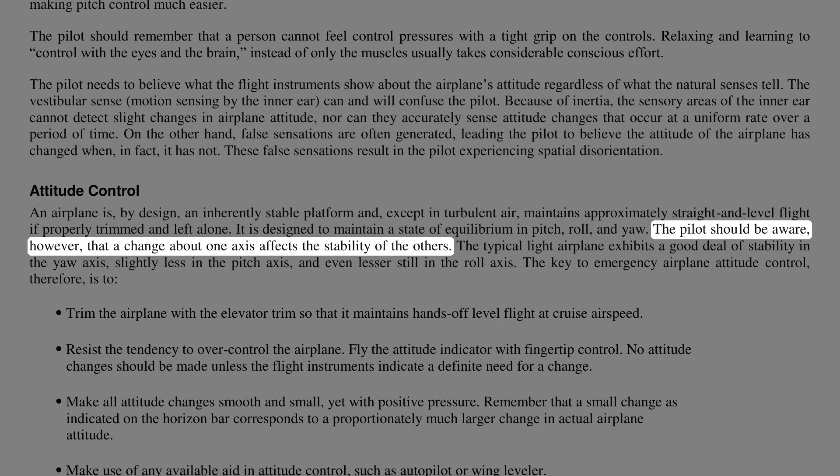The pilot should be aware, however, that a change about one axis affects the stability of the others. The typical light airplane exhibits a good deal of stability in the yaw axis, slightly less in the pitch axis, and even lesser still in the roll axis.

The key to emergency airplane attitude control, therefore, is to trim the airplane with the elevator trim so that it maintains hands-off level flight at cruise airspeed. Resist the tendency to over-control the airplane. Fly the attitude indicator with fingertip control.

No attitude changes should be made unless the flight instruments indicate a definite need for a change. Make all attitude changes smooth and small, yet with positive pressure. Remember that a small change as indicated on the horizon bar corresponds to a proportionately much larger change in actual airplane attitude. Make use of any available aid in attitude control, such as autopilot or wing leveler.

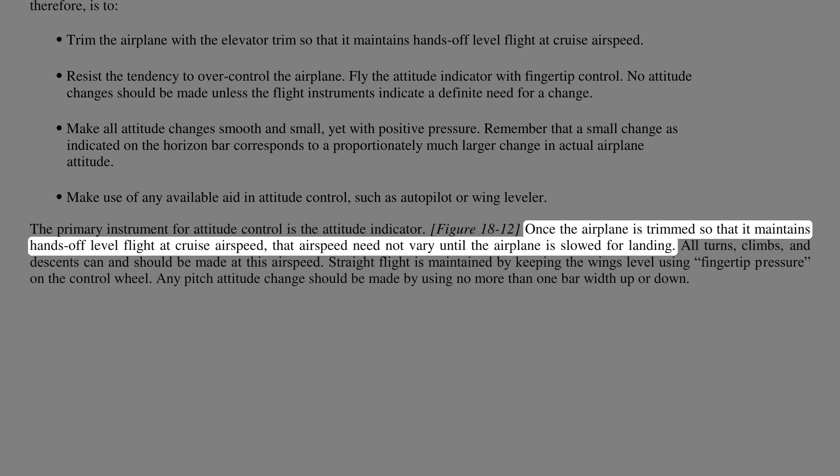The primary instrument for attitude control is the attitude indicator. Once the airplane is trimmed so that it maintains hands-off level flight at cruise airspeed, that airspeed need not vary until the airplane is slowed for landing. All turns, climbs, and descents can and should be made at this airspeed.

Straight flight is maintained by keeping the wings level using fingertip pressure on the control wheel. Any pitch attitude change should be made by using no more than one bar width up or down.

Turns. Turns are perhaps the most potentially dangerous maneuver for the untrained instrument pilot for two reasons: the normal tendency of the pilot to over-control, leading to steep banks and the possibility of a graveyard spiral, and the inability of the pilot to cope with the instability resulting from the turn.

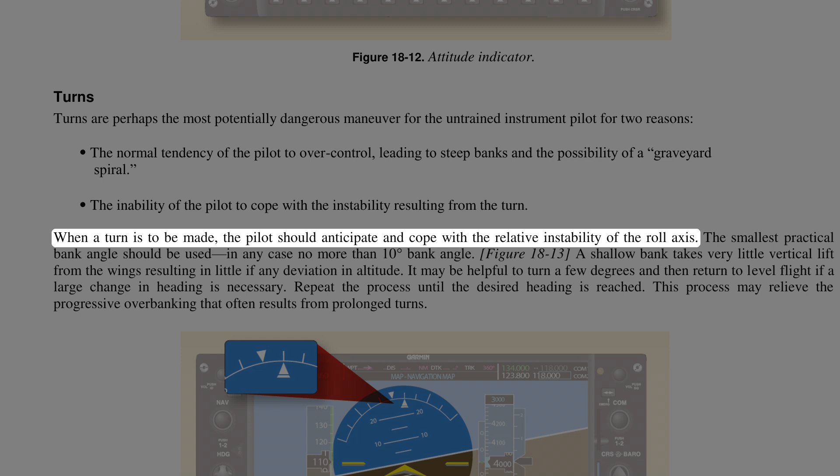When a turn is to be made, the pilot should anticipate and cope with the relative instability of the roll axis. The smallest practical bank angle should be used, in any case no more than 10 degrees bank angle. A shallow bank takes very little vertical lift from the wings, resulting in little if any deviation in altitude.

It may be helpful to turn a few degrees and then return to level flight if a large change in heading is necessary. Repeat the process until the desired heading is reached. This process may relieve the progressive overbanking that often results from prolonged turns.

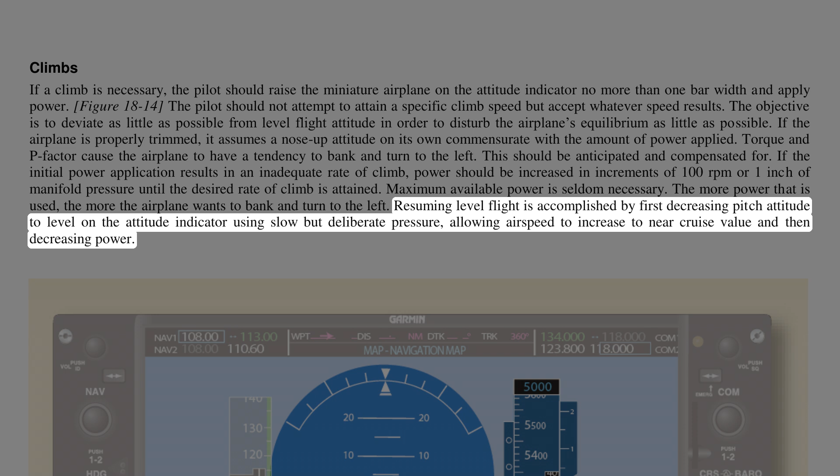Resuming level flight is accomplished by first decreasing pitch attitude to level on the attitude indicator using slow but deliberate pressure, allowing airspeed to increase to near cruise value, and then decreasing power.

Descents are very much the opposite of the climb procedure if the airplane is properly trimmed for hands-off straight and level flight. In this configuration, the airplane requires a certain amount of thrust to maintain altitude. The pitch attitude is controlling the airspeed. The engine power, therefore, translated into thrust by the propeller, is maintaining the selected altitude.

Following a power reduction, however slight, there is an almost imperceptible decrease in airspeed. However, even a slight change in speed results in less down load on the tail, whereupon the designed nose heaviness of the airplane causes it to pitch down just enough to maintain the airspeed for which it was trimmed. The airplane then descends at a rate directly proportionate to the amount of thrust that has been removed.

Power reductions should be made in increments of 100 revolutions per minute or one inch of manifold pressure, and the resulting rate of descent should never exceed 500 feet per minute. The wings should be held level on the attitude indicator, and the pitch attitude should not exceed one bar width below level.

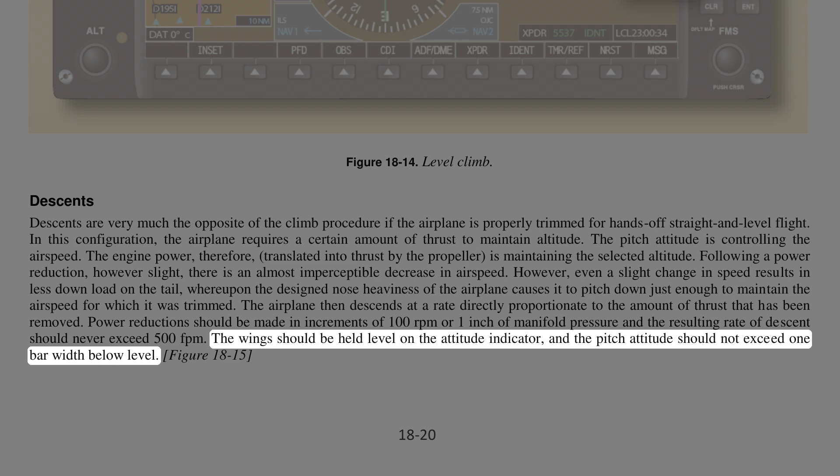Combined maneuvers, such as climbing or descending turns, should be avoided if at all possible by an untrained instrument pilot. Combining maneuvers only compounds the problems encountered in individual maneuvers and increases the risk of control loss. The objective is to keep the airplane under control by maintaining as much of the airplane's natural equilibrium as possible. Deviating as little as possible from straight and level flight attitude makes this much easier.

When being assisted by ATC, the pilot may detect a sense of urgency while being directed to change heading and/or altitude. This sense of urgency reflects a normal concern for safety on the part of the controller. Nevertheless, the pilot should not let this prompting lead to rushing into a maneuver that could result in loss of control. It's reasonable to ask the controller to slow down if this becomes an issue.

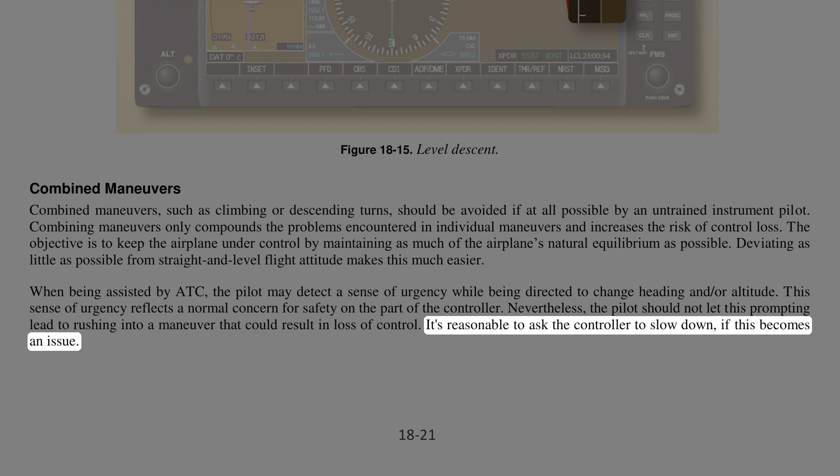Transition to visual flight. One of the most difficult tasks a trained and qualified instrument pilot contends with is the transition from instrument to visual flight prior to landing. For the untrained instrument pilot, these difficulties are magnified. The difficulties center around acclimatization and orientation.

On an instrument approach, the trained instrument pilot prepares in advance for the transition to visual flight. The pilot has a mental picture of what to expect when the transition to visual flight is made and will quickly acclimate to the new environment. Geographical orientation also begins before the transition, as the pilot visualizes where the airplane is in relation to the airport runway. In an ideal situation, the transition to visual flight is made with ample time, at a sufficient altitude above terrain, and in visibility conditions sufficient to accommodate acclimatization and geographical orientation.

This, however, is not always the case. The untrained instrument pilot may find the visibility still limited, the terrain completely unfamiliar, and altitude above terrain such that a normal airport traffic pattern and landing approach is not possible. Additionally, the pilot is most likely under considerable self-induced psychological pressure to get the airplane on the ground.

The pilot should take this into account and, if possible, allow time to become acclimatized and geographically oriented before attempting an approach and landing, even if it means flying straight and level for a time or circling the airport. This is especially true at night.

Emergency response systems. Airplanes may have installed systems that provide alternatives in certain emergency situations.

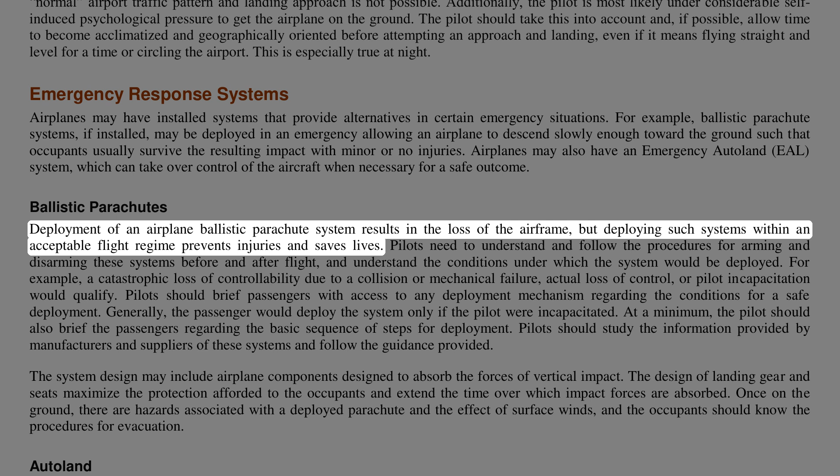Deployment of an airplane ballistic parachute system results in the loss of the airframe, but deploying such systems within an acceptable flight regime prevents injuries and saves lives. Pilots need to understand and follow the procedures for arming and disarming these systems before and after flight, and understand the conditions under which the system would be deployed.

For example, a catastrophic loss of controllability due to a collision or mechanical failure, actual loss of control, or pilot incapacitation would qualify. Pilots should brief passengers with access to any deployment mechanism regarding the conditions for a safe deployment. Generally, the passenger would deploy the system only if the pilot were incapacitated. At a minimum, the pilot should also brief the passengers regarding the basic sequence of steps for deployment.

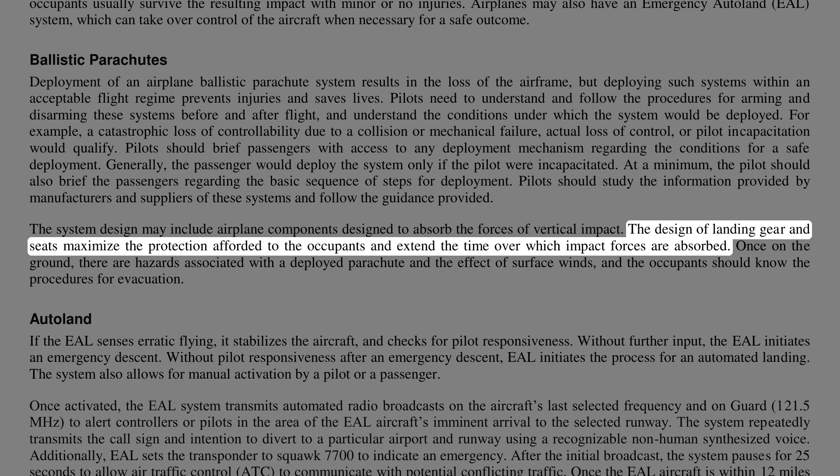Pilots should study the information provided by manufacturers and suppliers of these systems and follow the guidance provided. The system design may include airplane components designed to absorb the forces of vertical impact. The design of landing gear and seats maximizes the protection afforded to the occupants and extends the time over which impact forces are absorbed. Once on the ground, there are hazards associated with a deployed parachute and the effect of surface winds, and the occupants should know the procedures for evacuation.

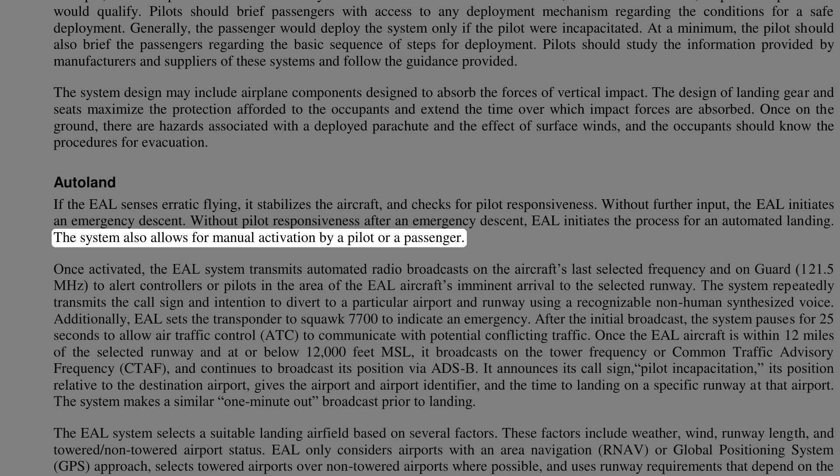Autoland: if the EAL senses erratic flying, it stabilizes the aircraft and checks for pilot responsiveness. Without further input, the EAL initiates an emergency descent. Without pilot responsiveness after an emergency descent, EAL initiates the process for an automated landing. The system also allows for manual activation by a pilot or a passenger.

Once activated, the EAL system transmits automated radio broadcasts on the aircraft's last selected frequency and on guard, 121.5 MHz, to alert controllers or pilots in the area of the EAL aircraft's imminent arrival to the selected runway. The system repeatedly transmits the call sign and intention to divert to a particular airport and runway using a recognizable non-human synthesized voice. Additionally, EAL sets the transponder to squawk 7700 to indicate an emergency.

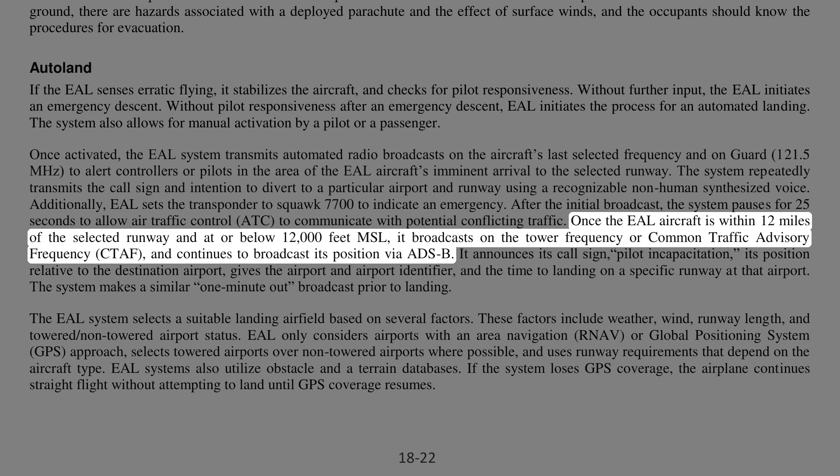After the initial broadcast, the system pauses for 25 seconds to allow air traffic control to communicate with potential conflicting traffic. Once the EAL aircraft is within 12 miles of the selected runway and at or below 12,000 feet MSL, it broadcasts on the tower frequency or Common Traffic Advisory Frequency, CTAF, and continues to broadcast its position via ADS-B. It announces its call sign, pilot incapacitation, its position relative to the destination airport, gives the airport identifier, and the time to landing on a specific runway at that airport. The system makes a similar, one minute out, broadcast prior to landing.

The EAL system selects a suitable landing airfield based on several factors. These factors include weather, wind, runway length, and towered versus non-towered airport status. EAL only considers airports with an area navigation, RNAV, or global positioning system, GPS, approach, selects towered airports over non-towered airports where possible, and uses runway requirements that depend on the aircraft type. EAL systems also utilize obstacle and terrain databases. If the system loses GPS coverage, the airplane continues straight flight without attempting to land until GPS coverage resumes.

Currently, EAL system capabilities do not include detecting and avoiding other aircraft, receiving or reacting to ATC instructions or notices to airmen (NOTAMs), avoiding military operations areas (MOAs), special use airspace (SUA), restricted areas, or temporary flight restrictions (TFRs), or turning on aircraft lights.

This chapter provided general guidance and recommended procedures that may apply to light single-engine airplanes involved in certain emergency situations. The information presented is intended to enhance the general knowledge of emergency operations with the clear understanding that the manufacturer's recommended emergency procedures take precedence.

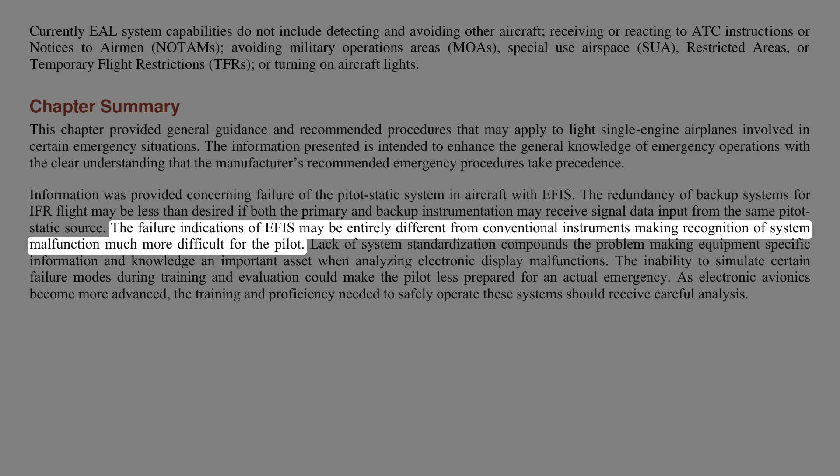Information was provided concerning failure of the Pitot-Static System in aircraft with EFIS. The redundancy of backup systems for IFR flight may be less than desired if both the primary and backup instrumentation may receive signal data input from the same Pitot-Static source. The failure indications of EFIS may be entirely different from conventional instruments, making recognition of system malfunction much more difficult for the pilot. Lack of system standardization compounds the problem, making equipment-specific information and knowledge an important asset when analyzing electronic display malfunctions.

The inability to simulate certain failure modes during training and evaluation could make the pilot less prepared for an actual emergency. As electronic avionics become more advanced, the training and proficiency needed to safely operate these systems should receive careful analysis.